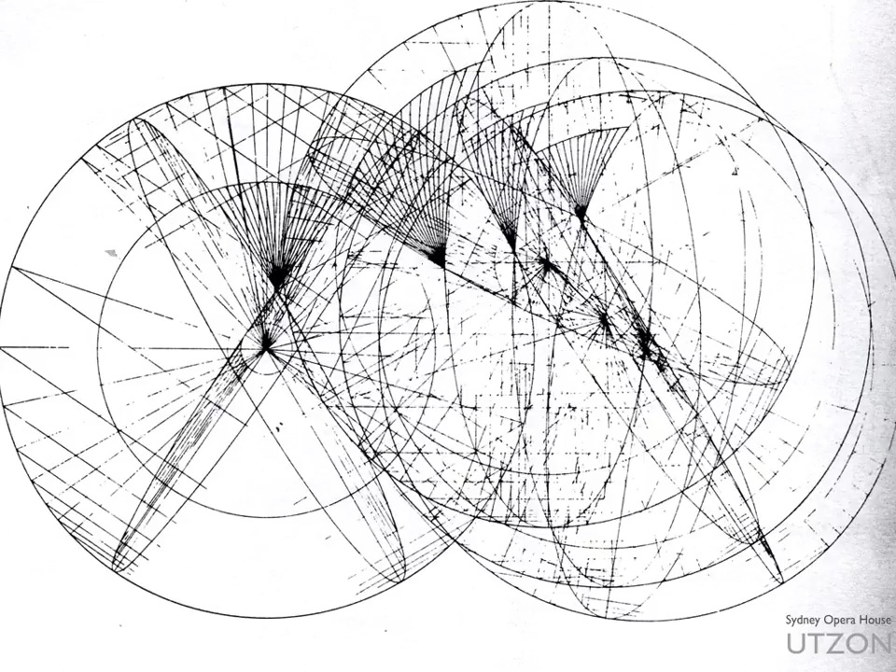The notion of parametrics in architecture has been around, but actually the Italian modernist architect Luigi Moretti really can claim authorship of it. He coined it in the 50s, in the 40s, even before the war, in his writings, and he encouraged in his research a link to modern mathematics, and his premise was that a new architecture will be labeled parametric architecture, and will be derived from absolute mathematical truth, independent of other factors.

So for Moretti, a goal of architecture systems was defining the relationship between dimensions dependent upon various parameters. He used the design of a stadium as an example of how its form can be derived from various parameters like cone of vision and seating arrangement, and acoustics. So different versions of the parametric stadium designed by Moretti were presented at his parametric architecture exhibition at the Milano Triennale in the 1960s.

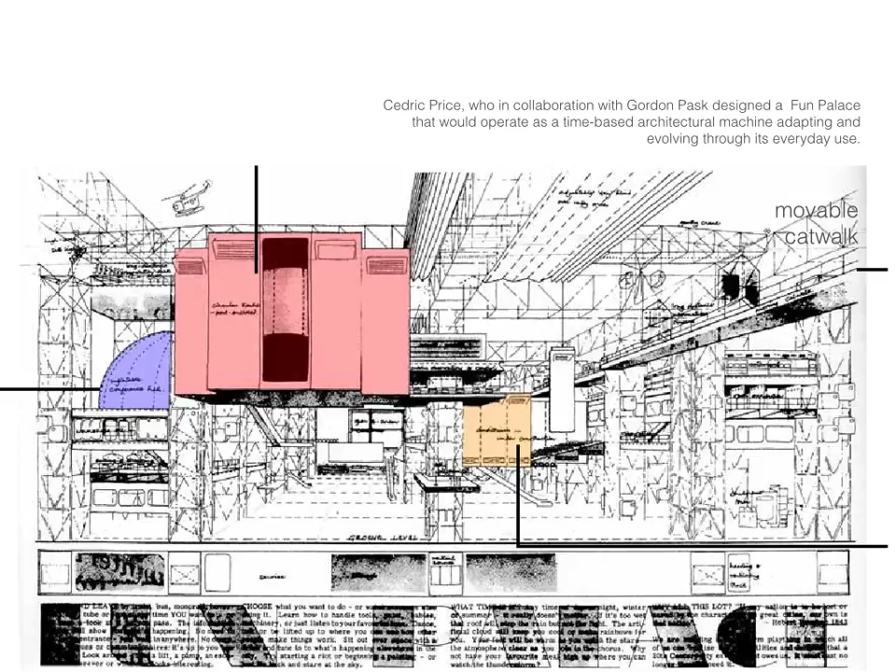And here is another aspect of the Fun Palace project, and this has a very surprising relationship to the building which you know well, which is the Pompidou Center in Paris, a competition won by Renzo Piano as a young architect about 5 or 6 years later. The use of space frame and use of an aesthetic of change and high-tech industrial aesthetic was very much proposed by those groups of people. So computing on one hand, and then this kind of stuff.

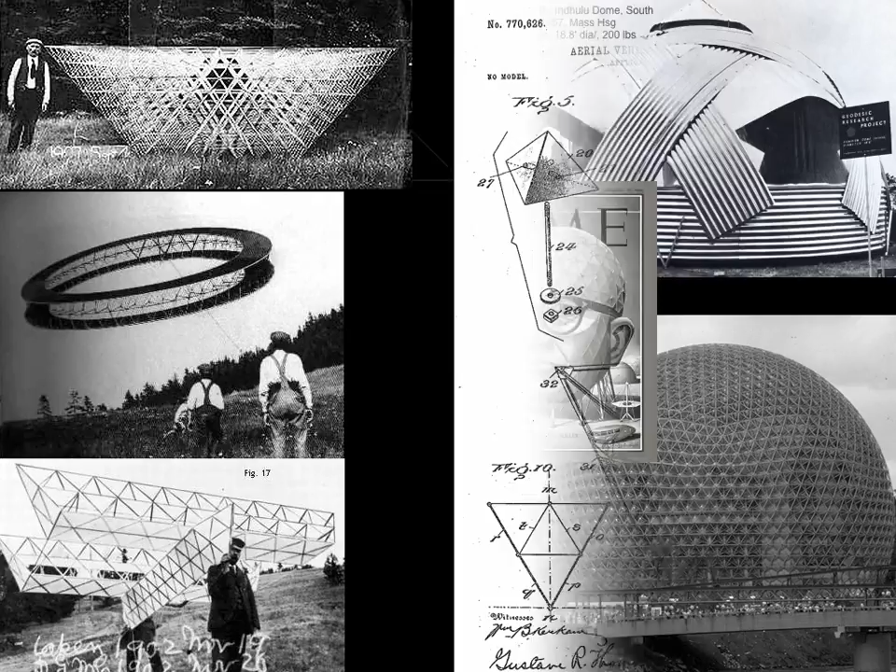Another person who pursued this issue of space frames and was very original in his work was Alexander Graham Bell. This is earlier than Fuller, and also different aspects. You know him because he invented the telephone, right? An American and later Canadian inventor. So he patented a space frame type of structure early on and used it for kites and his flying machines, which were largely unsuccessful, but the telephone was much more successful, of course. Those were frames which were rigid; well, they could fly, but they were rigid.

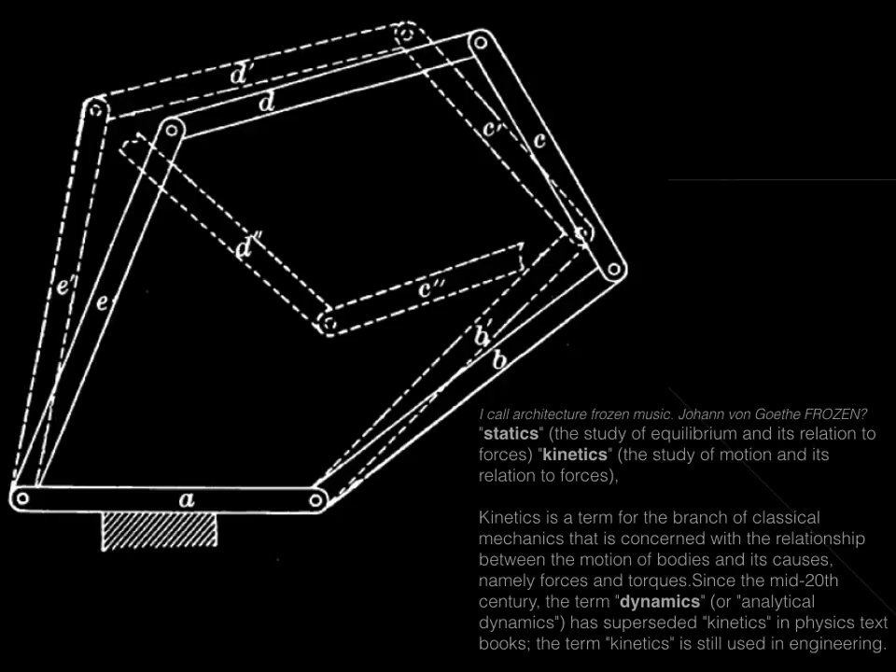So I want to make a little digression, starting with this famous detail of Johann von Goethe. He called architecture frozen music. I think we need to reflect on that a little bit more, because architecture is an equilibrium of forces, and statics are central to it. But kinetics, which is the study of motion, is also admitted now to architecture. The term kinetics, which relates to classical mechanics, is concerned with the relationship between the motion of bodies and its causes. Today, kinetics is substituted in physics by dynamics, and that in turn brings us to the study of motion.

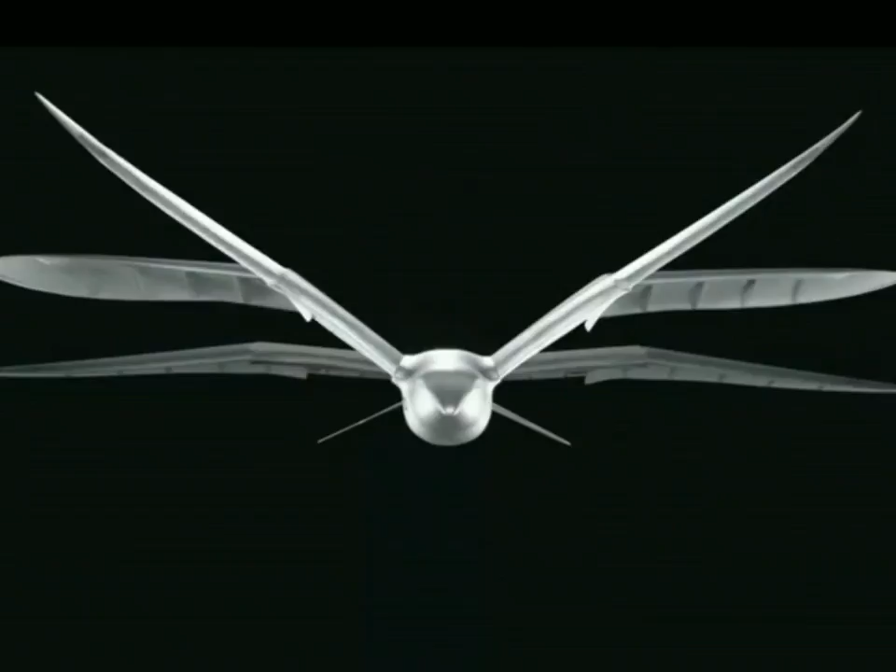So if you go down, you have the large area of propulsion, and if you go up, the wings are not that large, and it is easier to get up. So the next thing we did, or the challenge we had, was to coordinate this movement. We have to turn it, go up and go down. We have a split wing.

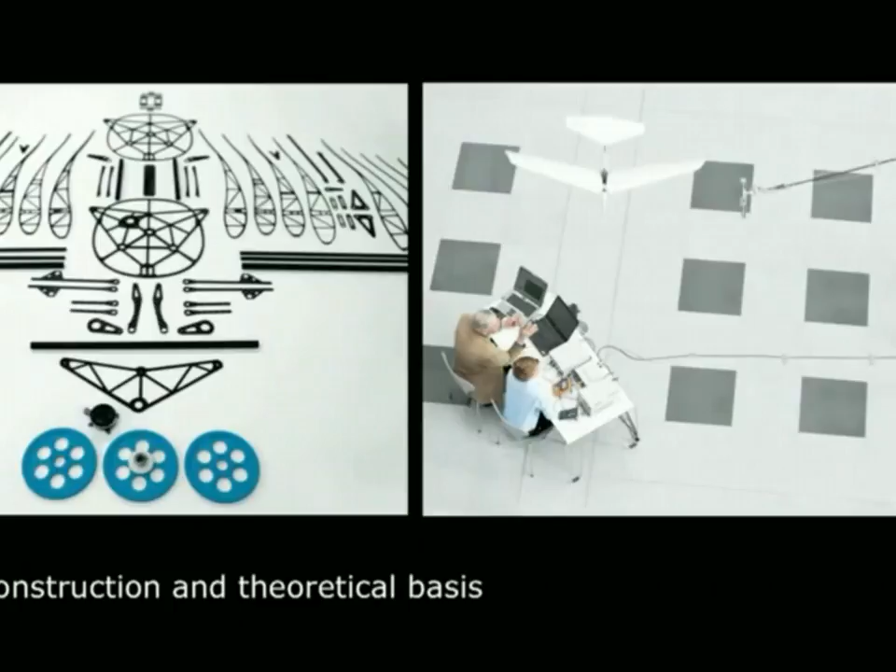With the split wing, we get the lift at the upper wing, and we get the propulsion at the lower wing. Also, we see how we measure the aerodynamic efficiency. We had knowledge about the electromechanical efficiency, and then we can calculate the aerodynamic efficiency. So therefore, it rises from passive torsion to active torsion, from 30% up to 80%.

Next thing we have to do, we have to control and regulate the whole structure. Only if you control and regulate it, you will get that aerodynamic efficiency. So I think it was interesting for those who don't know this project. I think this pursuit of analogy to nature is also important in some of those engineering projects, and also important in our discipline.

So that brings me a little bit back to the concept which you probably know from your history of architecture, the concept of metabolism. That's a group of Japanese architects. Among them, a key person in this group was Kikutake. And the notion of metabolism stands for transformation of cells of living organisms, which allows growth and reproduction in response to the environmental conditions.

So Kikutake's metabolism proposals were somewhat utopian, but they were distinguished by his understanding of the city as a generative process that works in a cyclical fashion and has the potential to further define and evolve the urban system itself. Its three critical principles were the investigation of alternative environments, adaptability of the city and housing unit, which had to be capable of being replaced as required, and the conception of architecture as ecological entities with life cycles that could be renewed in response to the environment.

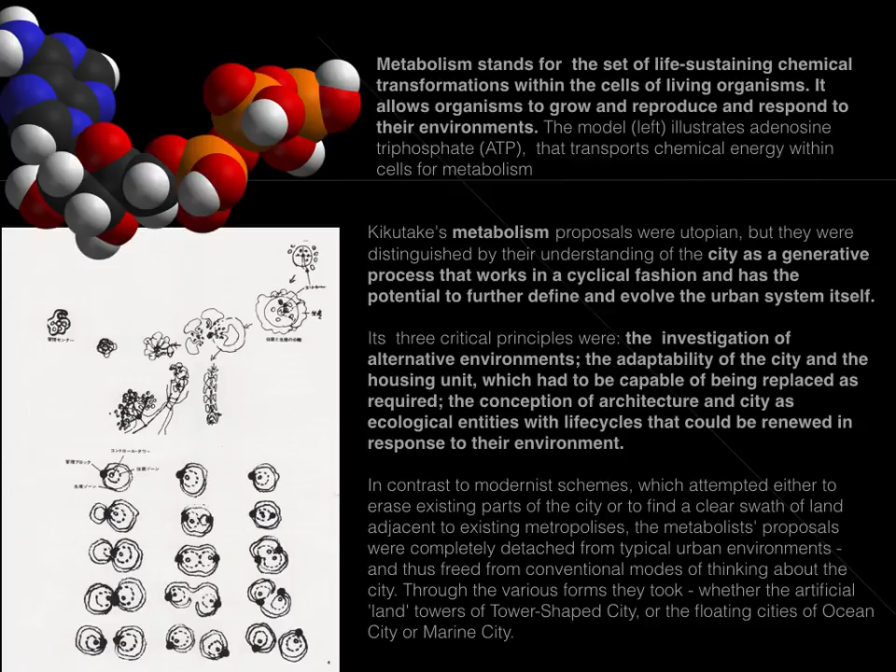So those early schemes proposed continuing metabolic transformation of the urban tissue, and their architecture was actually related to that. This was demonstrated by his project titled Ocean City, where living units could be replaced and the city could be transformed through a process of continuous reassembly and refabrication.

Interesting to observe as a sidetrack that one of Kikutake's star students was Toyo Ito, who later became a leading contemporary architect. So it's kind of connected, this culture. Of course, this was all before computing. In the UK, at the AA, there was a group of students and young teachers around John Frazer.

This unit was particularly active in the early 90s, and they explored the use of early computer techniques to empower the idea of evolutionary architecture. So it was a kind of form of metabolism, but there were also attempts to use generative tools, early CAD tools, to model and develop schematic projects which explore this concept of evolutionary architecture.

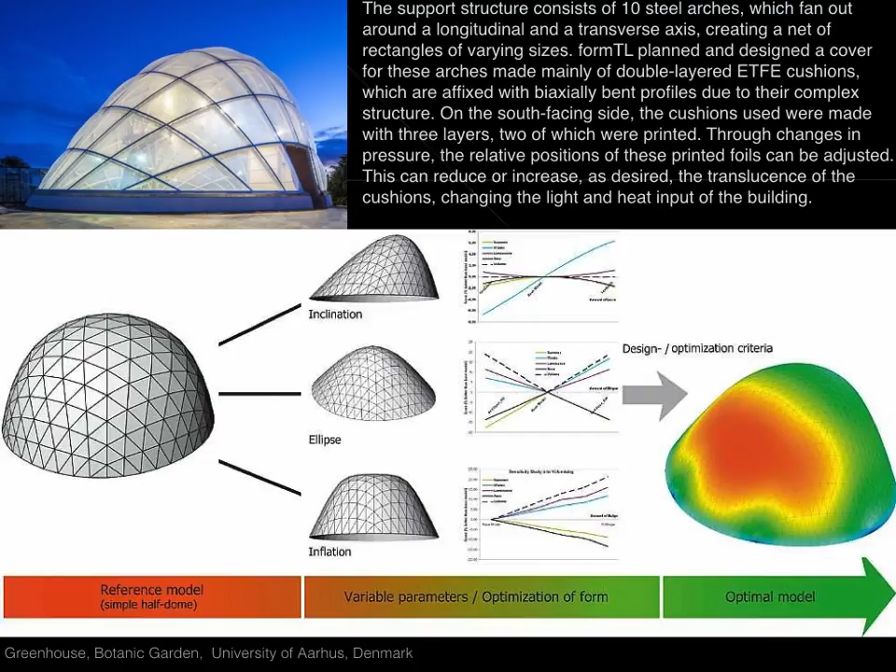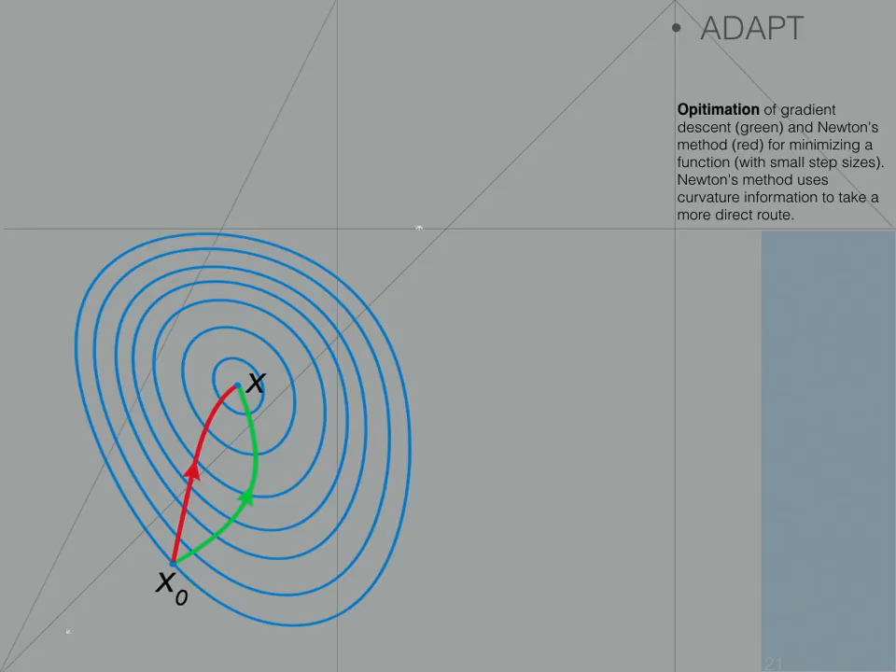There were optimization techniques which I will not go into, but I want to make a reference that those techniques are to some extent inspired by natural strategies for optimization, because it is well known to people who study natural sciences that those processes have always been a source of information and inspiration to science. Organisms which are single cell, like bacteria, can often engage in a rich repertoire of interaction and resolve into a kind of system which is active.

Now, the introduction of modeling, particularly 3D printing tools: at an early stage they were still kind of pricey, so only big units could have access to them. Norman Foster's office had a part of the office devoted to this problem, which they called the specialist modeling group, and they explored this new geometrical territory through the use of programming and parametric software. This was way before Grasshopper came about, so it was hard coding.

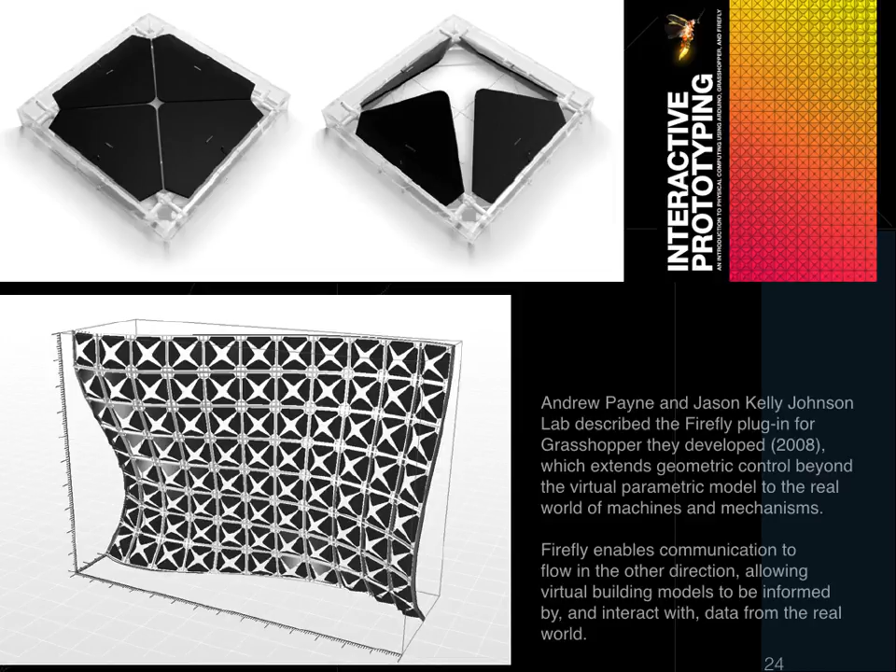So that was a very important step for parametric design to start being fed with environmental factors. This was a very important tool, and it's still in existence and developed. I think we use it in our robot studio. One of the projects which emerged relying on the dynamics was the kinematic facade of the Ocean Pavilion for the 2012 Expo in Korea. I think you know this project well.

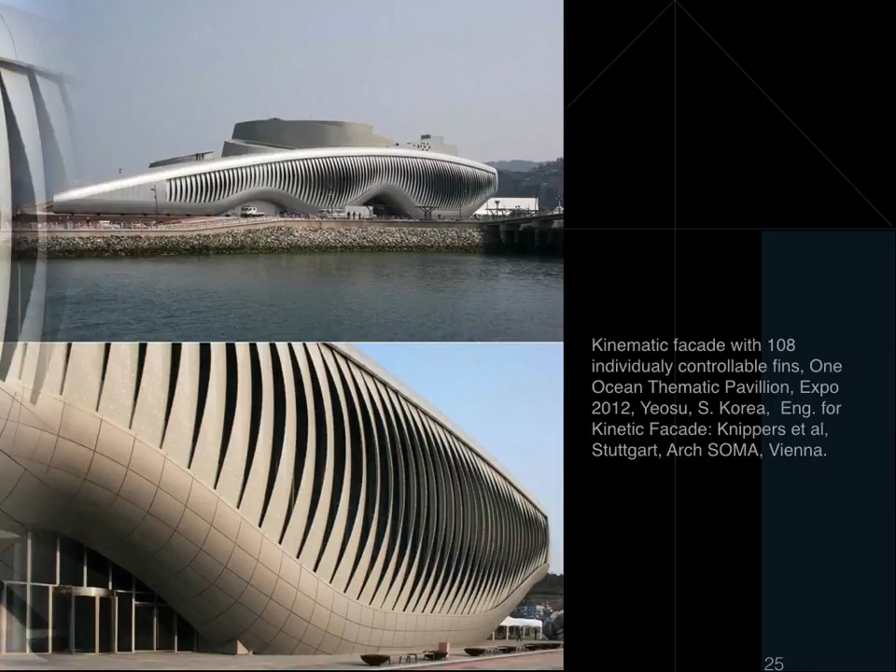This was the winner of the competition and had these fish-like fins, which were de facto a kinetic facade made out of fiber reinforced plastics, capable of being morphed into a number of animated patterns depending on the program requirements. This work in terms of programming technology was done at the University of Stuttgart, where those biologically inspired motion mechanisms were brought to architectural scale.

Those new techniques require, of course, closely related fabrication methods, and they are related to parametric design. There's a relationship of fabrication to parametric design. Digital instruments and practices have the potential to narrow the gap between representation, between design and making. Its essence is the ability to generate construction information directly from design information. That is why people predict a new role for the architect as that of digital craftsman.

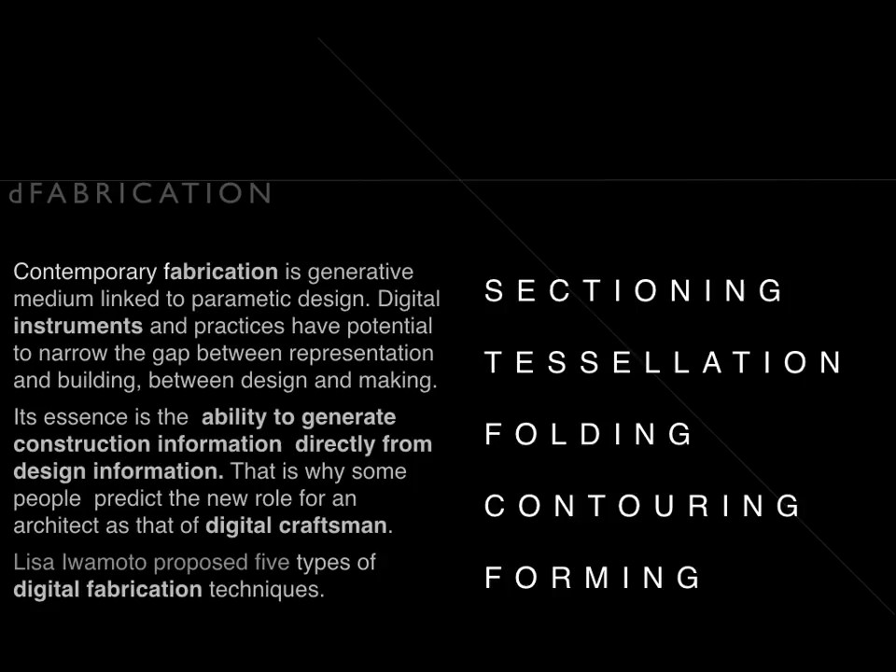Lisa Iwamoto, a young teacher in the US at the time, wrote a book where she tried to organize different types of fabrication techniques. She proposed 5 types: sectioning, tessellation, folding, contouring, and forming. This is an arbitrary structure, and I think you can devise your own, but the type of design emerging from each of those techniques has its own characteristics. So sectioning, where the 3-dimensional model is bisected, layered. Ask the Box, the project Professor Swick's students did here a few years ago, was exactly that.

It was sectioning. Another methodology for fabrication is tessellation, where the object is tessellated and then flat elements are produced with CNC and assembled. They are closely related to the method of designing. The method of production has become related to the method of designing. The concept of folding as a production of the object is also kind of obvious. Another category of fabrication she sees as contouring. This is done with CNC by removing the material. And the final category was forming, where things are cast.

Extending this concept of new condition for design, triggered by initially CAD and then parametric design, algorithmic design and fabrication. The impact of it is now entering public domain. I want you to take a look at the work of Meejin Yoon, who is now a young professor at MIT.

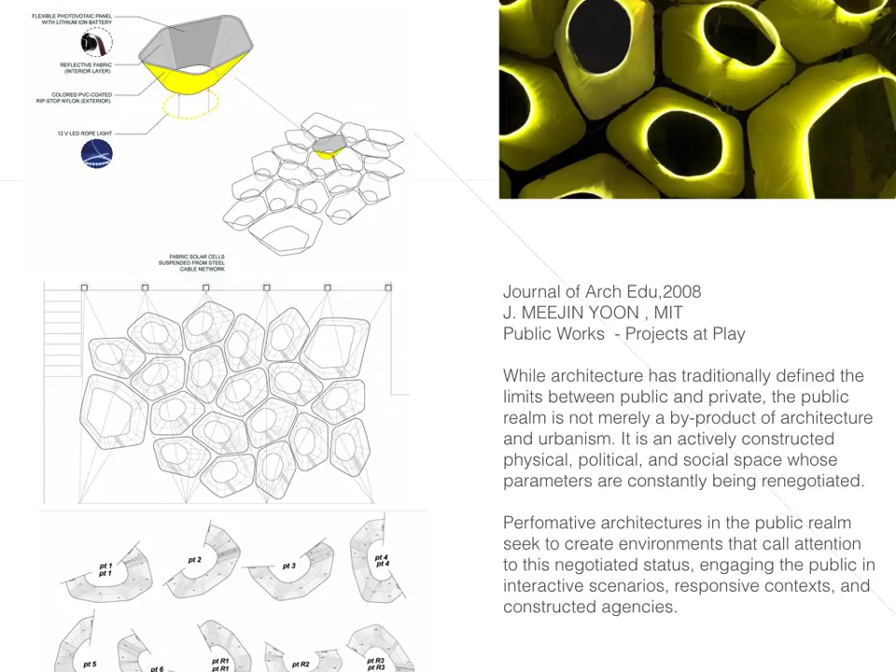This is a project which we'll see in a minute in some detail, which is an interactive installation in the form of a suspended ceiling, where photovoltaic panels were gathering light and lithium batteries charged to also generate LED lighting. And the process of making it and assembling it was important to her. I would like you to look at a fragment of her lecture, which is not that old. I think it is interesting.

So there's really nothing I dislike more than public speaking, and that's odd for someone who's so invested in the public sphere and the public realm. I'm trained as an architect, so I'm used to building walls and separating myself from the public. One of the things that has fascinated me is this kind of sometimes invisible line between public and private.

This is a piece by Vito Acconci called Following, in which he has a very simple set of rules for this performative practice where he decides to follow someone in public space, and as soon as that person goes into a private space, he waits until he sees another person and follows them in public space, and so on and so on. And by engaging in this itinerary, he actually remaps the city based on a series of individuals' experiences of publicness within the urban context.

So, I don't know, 15 years ago, I arrived at MIT, very uncomfortable because my background is not in technology. I went to pretty traditional architecture schools, and when I arrived at MIT, I was very anxious. So the first thing I did was I decided I should take a course, even though I was a faculty member. So my first semester as an assistant professor, I took a course called How to Make Almost Anything. It's at the Media Lab, taught by Neil Gershenfeld, and it's a crash course in microcontrollers and fabrication.

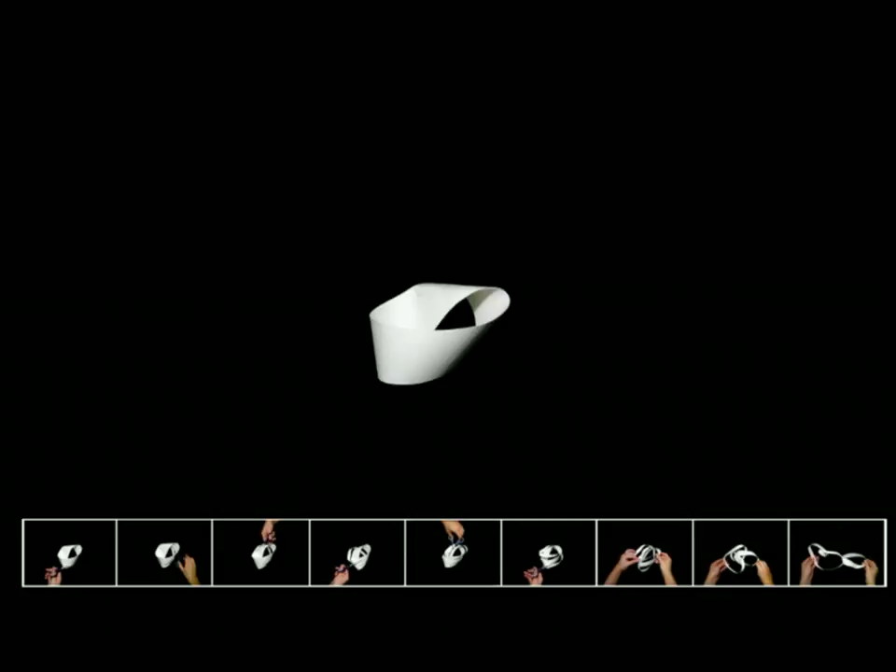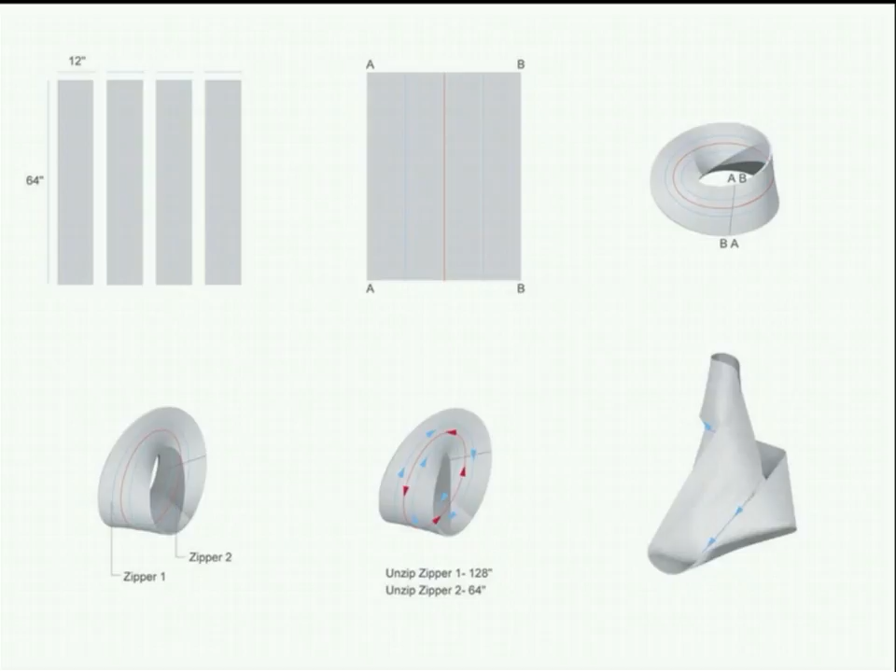And so I wanted to synthesize these two ideas and create a garment, and this is the Mobius dress, and essentially it is a literal Mobius strip that's turned into a wearable garment. The idea is to combine both the curvature of the Western garment and the efficiency of the kimono, and to create a very, very long linear Mobius strip with a super long custom zipper, so that this Mobius strip can be worn, essentially to be unworn, and as it unravels, the body structures the form of the garment in different ways.

So in terms of responsiveness, I think that architecture has a way of creating relationships between content and context in the public sphere. Also, about a decade ago, I was asked to do an exhibition, and this was what was given to me. It was an itemized spreadsheet of about 400 Aztec artifacts, and the curator wanted to display these objects in the Guggenheim Museum. And the first thing I learned was that the Guggenheim Museum was too small, that because of the geometry of the Guggenheim along the ramps, there wasn't going to be enough surface area to accommodate all these artifacts.

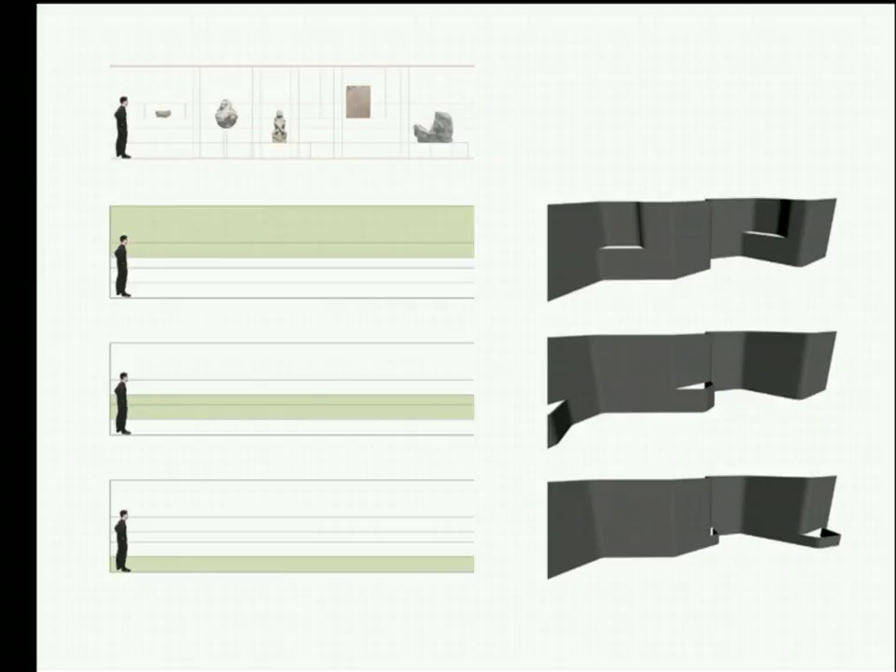So the design idea became about creating surplus surface. And in order to do that, there was a very simple formula of undulating a wall in and out. And all of those objects had certain criteria associated with them depending on which lending institution they came from. So certain objects needed to be behind glass, others didn't have to be. There were issues of scale. And so it was the first time where I designed something via a spreadsheet.

Essentially, what we did was create these pocket parameters where every artifact was tagged with the way that the wall that housed it needed to behave around it, to create a mediation between housing the artifact and the context of the Guggenheim and its ramps. And it became a really useful design tool and visualization tool to move back and forth with the curator, who constantly changed the sequence and order of these artifacts until the very last minute.

And the wall is clad in half-inch thick felt, and the other thing it did to transform this public space was it absorbed not only light, but sound. So it created this deep, dark, mute envelope, and I guess you can tell because this is actually a very live space, but acoustics affects how you understand public space. And so here at the Guggenheim, for the first time, this deadening silence instead of the live bouncing of noise altered your tempo, your perception of the artifacts.

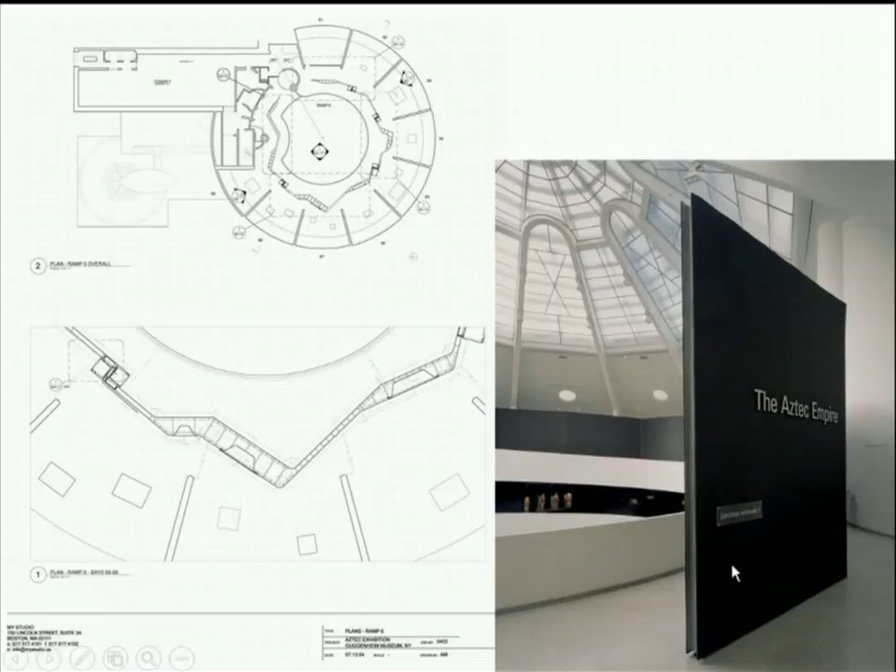So essentially, you come up the backside, you see all the large artifacts that didn't fit in the system, and then you come back down on this side. And when you come back down on the other side, these are the environmental vitrines for the really precious artifacts. And in order to see them, you essentially have to get right up against that felt wall. And this is the view looking down.

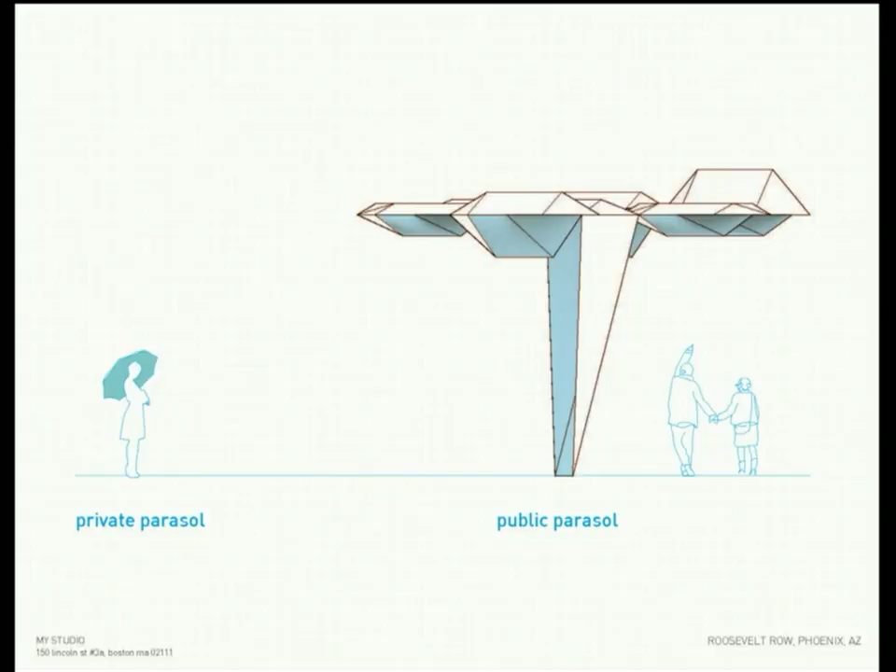So this notion of responsiveness to context, I think, also refers to the environment as well. I was asked to do a public space project in Phoenix, and it seemed that the only way to create public space outdoors in Phoenix was essentially to create shade. So the project became about creating shade through this notion of a public parasol. I'm, as you saw earlier, fascinated by Mobius strips, and so essentially the unit for this shade device was a Mobius strip, a very efficient strip.

But what was important about the geometry was that in certain angles, it would cast a shadow to create shade, and in other angles, it would frame light through a shadow. So the project is called Shadow Play, and it clusters these Mobius strips together to create this public parasol. The public space is in a traffic island, a triangular traffic island.

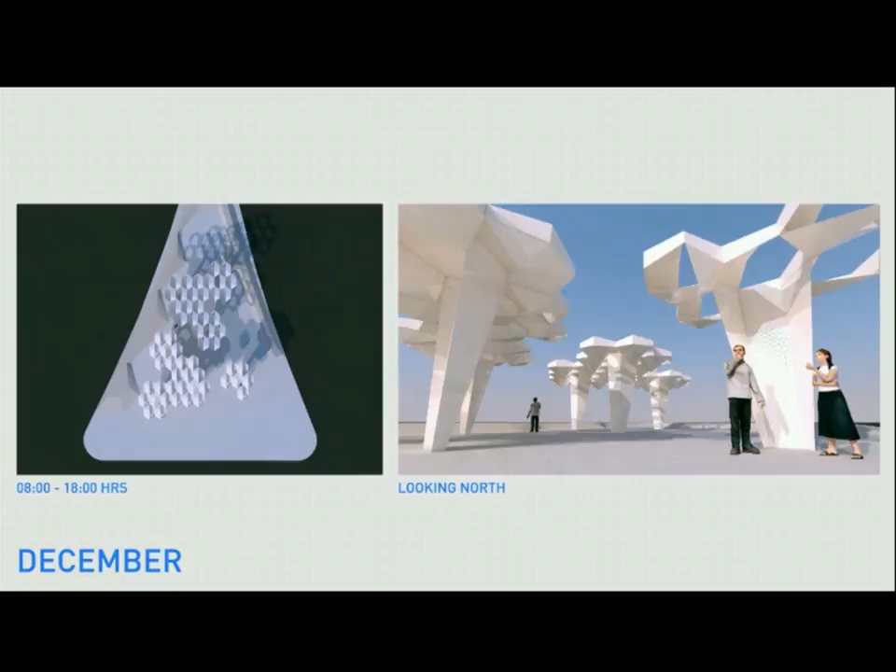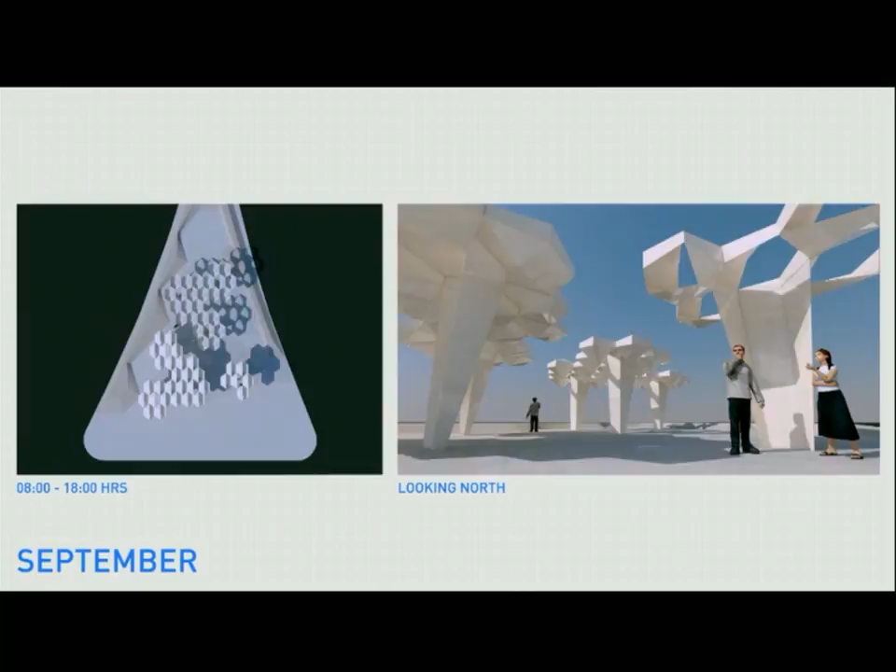And what was really important was to understand the relationship of the shade and shadow based on different months of the year, depending on the solar angle, and to make sure in the hottest moments there was maximum shade, but in other parts of the day, morning and evening, there were opportunities actually to see the sky, to create ventilation, and to cast these dappled light shadows.

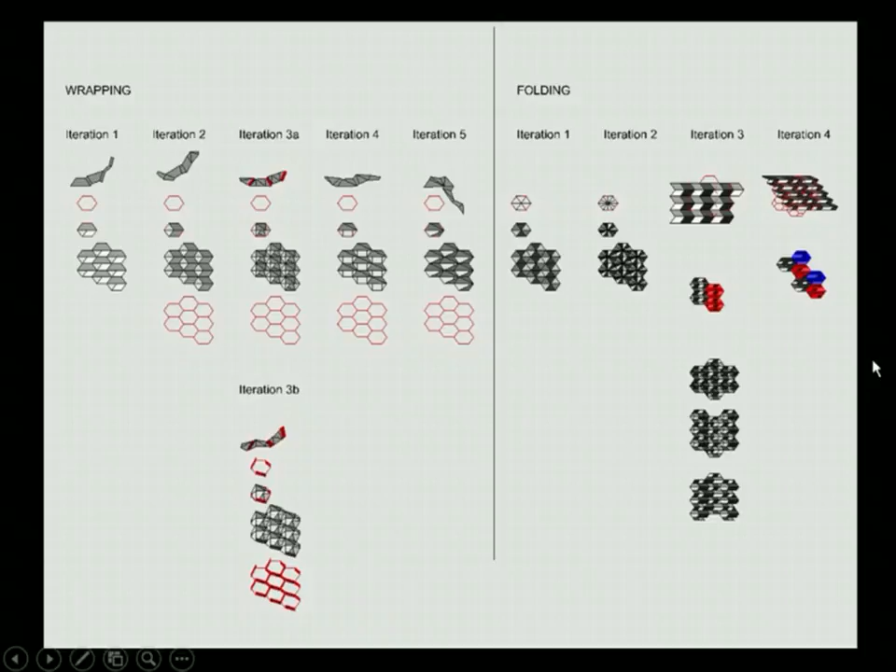And what also became really important was how to minimize the amount of material to create this shade. So these are a series of different iterations that look at the geometry and the structure of that geometry and how much material it would take. So these are different deflections of different geometric iterations of those units. And you can see that depending on the geometry, they torque and twist and deflect in different ways.

And through these studies, we were able to reduce the amount of material by, I think, 20 tons, which was quite substantial and reduced both cost and material use. So it's super thin, almost feels paper thin. It's currently under construction and it should be done in a few weeks. Sorry, I said days, weeks. I wish it were done in a few days. But the top of this canopy has solar panels, and so at night, it emits the light.

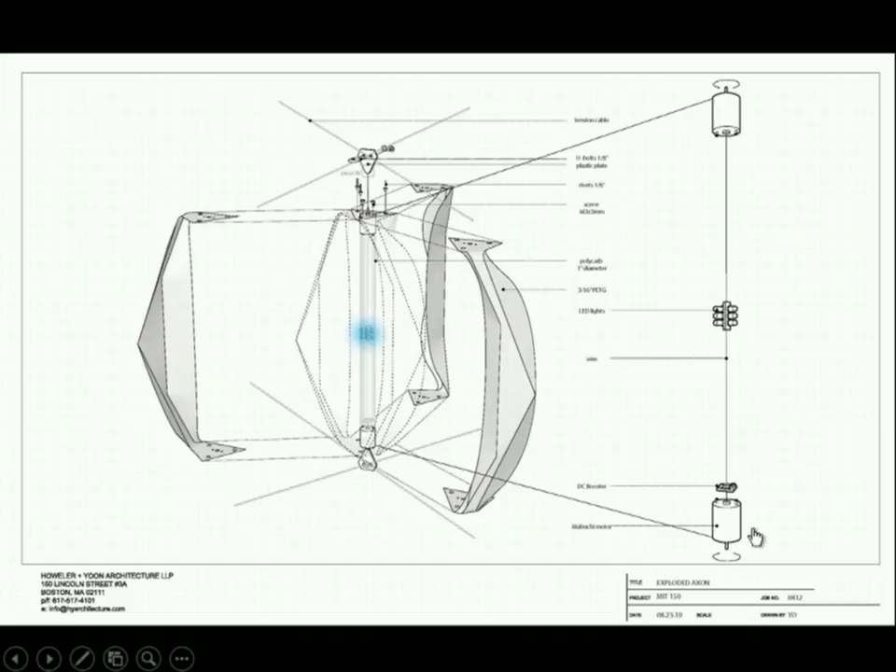I think the other thing about public projects is they make visible things that people are less aware of. And so this is part of an environmental series. This one's called Windscreen. And with very, very cheap materials, I think all of these things cost, if you add them together, $2.50, to create a micro wind turbine and to affix it to a building at MIT that is notorious for its wind. It's called the Green Building, because the wind's coming across the river and then it goes up this tower and then back down.

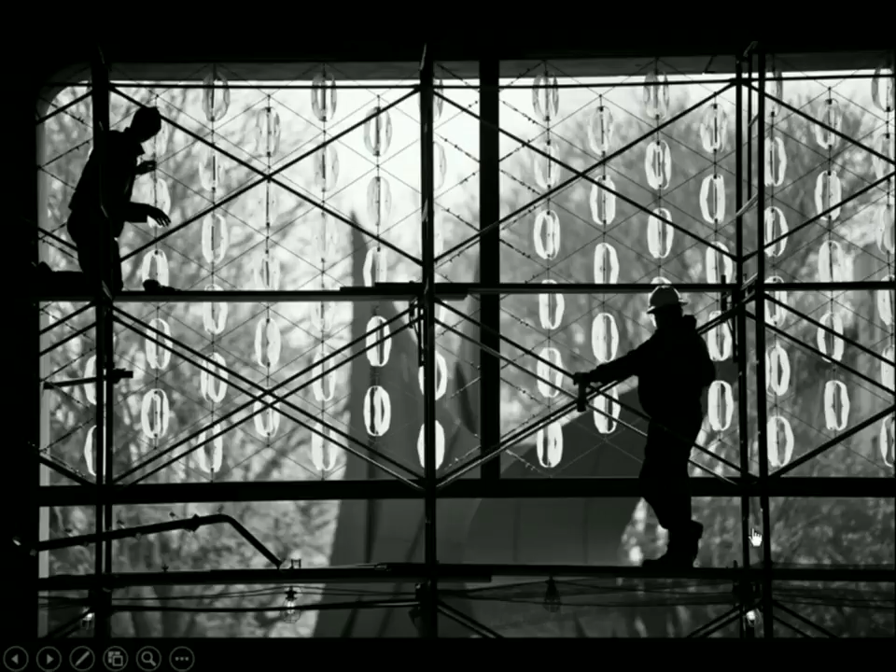So in the portico, we hung these small windscreens for MIT's 150th anniversary. And the idea was just simply to make visible this natural, abundant, renewable resource that's around us all the time. And basically the speed of the wind, the angles of the wind, is generating the light quite literally through the mechanical movement of the turbine. Nothing's stored, it's just purely made visible.

And this idea of making something visible in order to mediate is something that's interested me in the architectural work as well. And so a few years ago, I had an opportunity to design a space for the Boston Society of Architects. They had a competition because they were moving from a very vertical building to an adaptive reuse building in which they were getting a large square footage on the second floor of the building. The BSA has a kind of notorious old boy reputation, insular, and so this became an opportunity, I thought, in the competition to really celebrate it as a public space.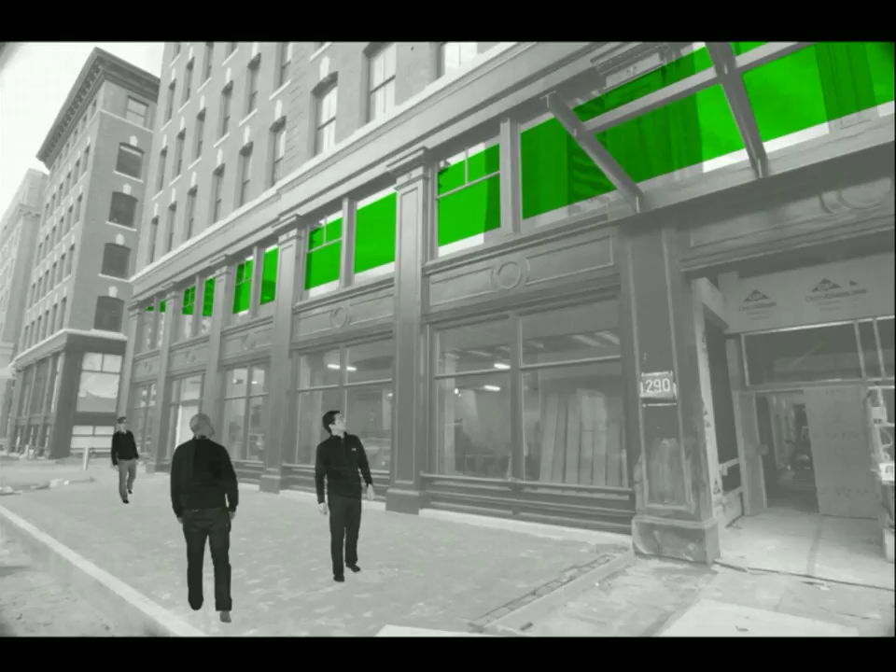And so part of the program brief was it had 20,000 square feet of space, but 5,000 square feet was dedicated to public gallery. So for the competition, what we thought was important to do was, given it's on the second floor, be very strategic about it. So how do you get someone to pay attention and know something might be accessible in public on a second floor? So we gave it this bright green ceiling. And then the key was really, how do you scoop people up to get them to that second floor?

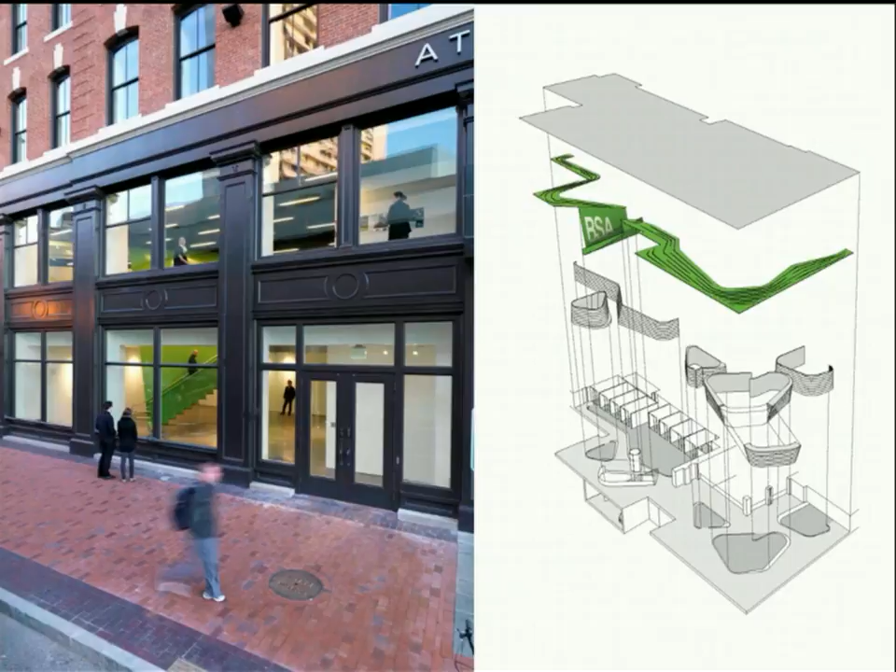So we wanted to create a supergraphic that extended beyond each of those kinds of windows, something unusual that would draw people in. And then what we did was we pushed all the office spaces and administrative spaces towards the back and put the conference rooms interspersed in the middle as islands in order to essentially create a mixing chamber between the architects, the students, and the public, but fundamentally to give up all of the perimeter to the public gallery space.

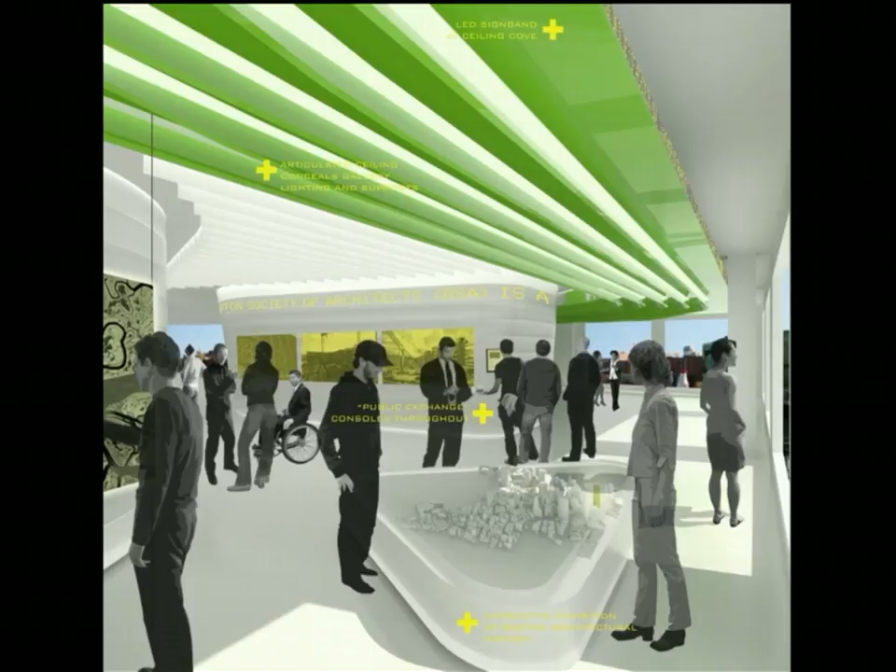So this was a risk in the competition because they didn't ask for that much gallery, and we turned the whole thing into public gallery. But somehow it won, and the BSA has really transformed because of this set of spatial relationships. So the stair is made super thin. It becomes the ceiling, which then has the infrastructure for all the exhibitions in terms of lighting and tracks to hang work.

And we thought it was important to have the gallery on the perimeter so you could always be aware that what was happening and being exhibited in the galleries was clearly having an impact or transformative of the urban context, or could be if people were willing to think that way. The strongest element of the space was the stair to get the public up one floor. And we wanted to make it, again, paper thin, and use that surface as a mediated surface. And so here, this is the BSA Twitter feed projected on the stair to draw people in.

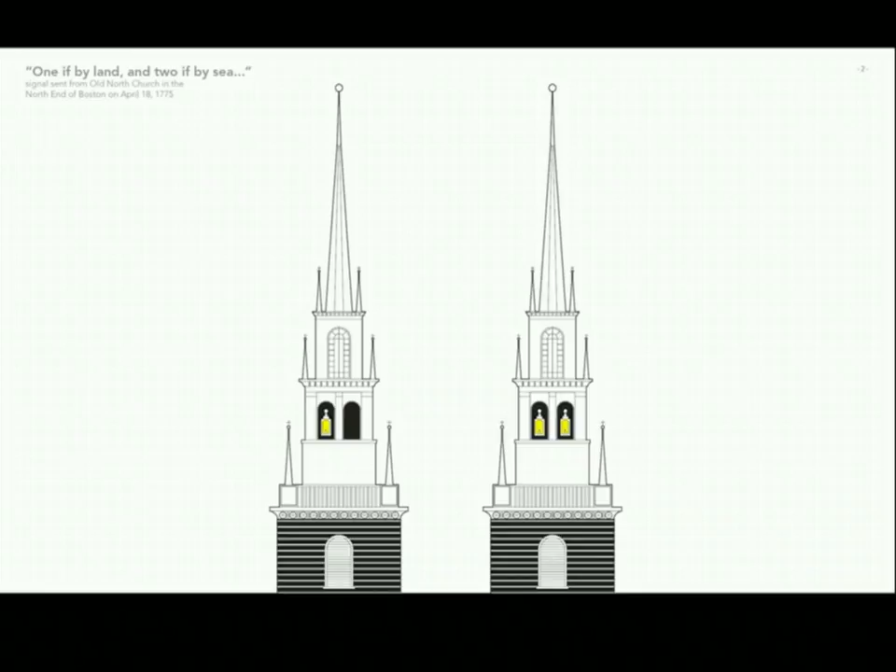So this notion of communication, I think, is very important in the public sphere. And I think, as you can see in my work, I often use light because I think light is communicative, and I love this, one if by land, two if by sea, that very simple on-off can actually have a powerful, powerful message. A few years ago, I was asked by the General Services Administration to create a light installation at the U.S.-Mexico border in San Ysidro.

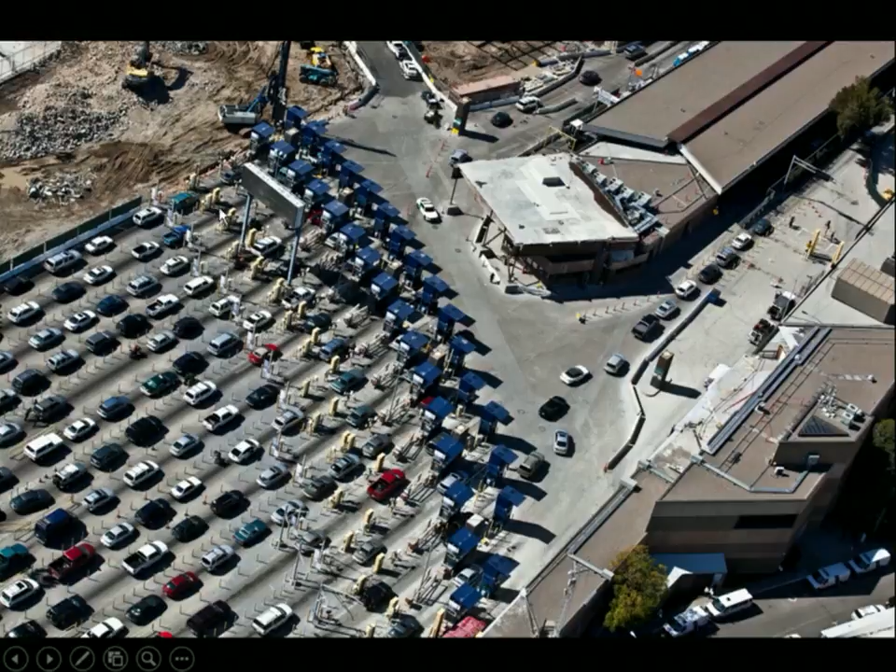It's the largest land port in the United States, and they were making it even larger. Apparently, it could take up to 6 hours to cross this border by car. So they were expanding the lanes to 27 lanes, and this is designed by Miller Hull. And I was asked to create some art here. And I was like, okay, what do I do? There's really no site, so I decided to be very minimal and integral with the piece.

So it's called Double Horizon, and all I did was create a linear light fixture, essentially, under the canopy. But what the light fixture does is it basically shows in real time the movement of cars through these multiple security checks as they go through. And so this drawing shows that there are, I don't know how many sensors there are, but over 30 sensors for every car in terms of the things that are being measured and scanned and weighed as every vehicle goes through.

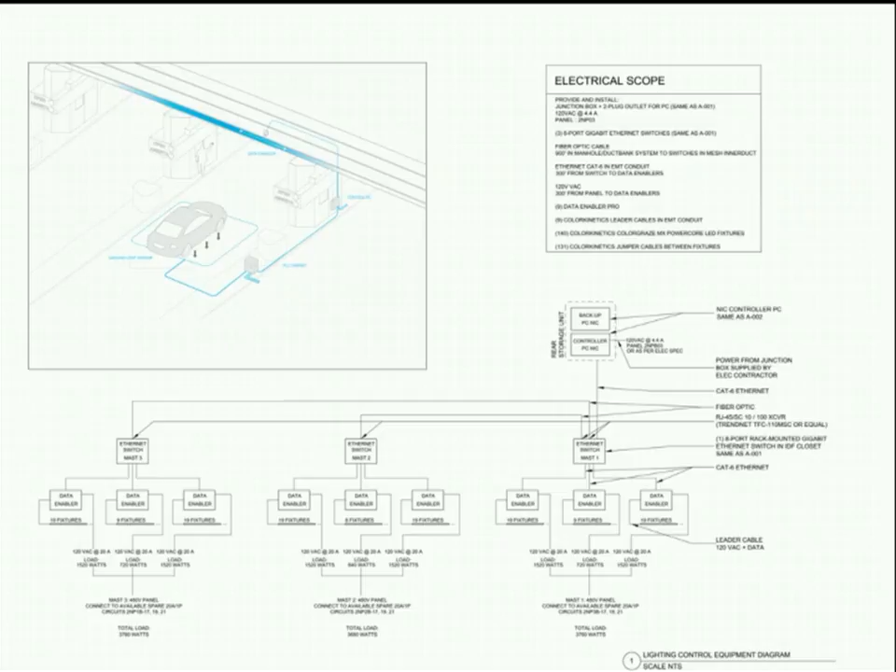So the piece was very simple, that there would be a kind of flicker of light every time a car passed through the security check, that light would flicker outwards, and as other cars move through the 28 lanes, it would also create a kind of moment and a ripple, and then these would interface with each other. Very simple idea. Really hard to do at the U.S. border, because of all the issues of security. And so even though there are so many sensors and all of this data is being recorded, we were unable to access or tap into any data.

And in fact, they wouldn't even allow us to run our fiber optic cable in the same conduit as the other fiber optic cable for fear of adjacency. So we had to do a workaround, which basically is able to, without tapping into their infrastructure or information, know when a light is switching from red to green or when there's a change in current. And we tap into that information in order to create Double Horizon.

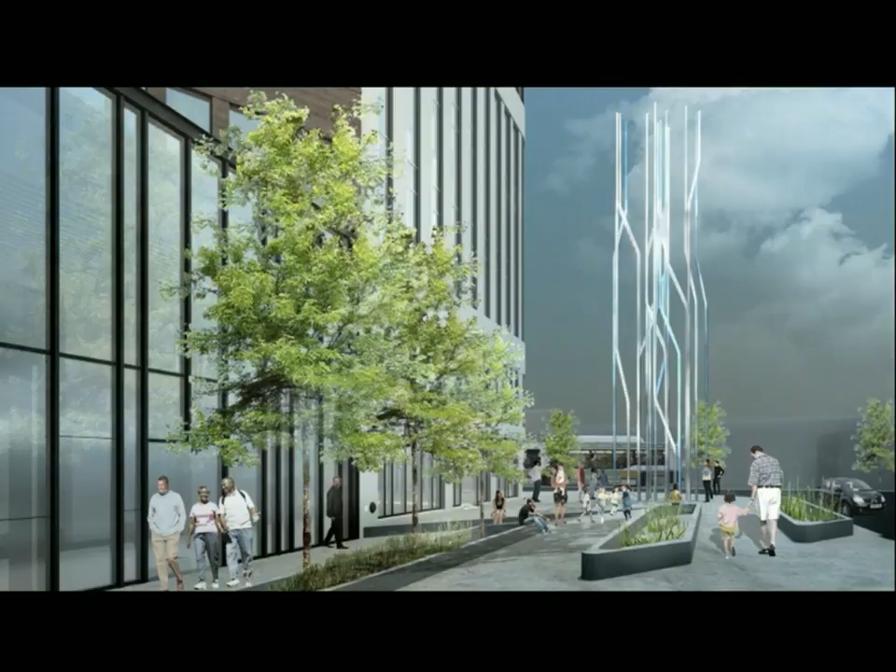So this is one evening a few months ago. You can see the light rippling through, and you can see this pretty far back, and something to pass the time as your 6-hour wait has been reduced to now about 40 minutes. So this idea of data and public space, I think, is really a new field. And recently I was asked to do a sculpture for Dudley Square in Roxbury in front of a new building for public education. And the sculpture is very literally a sculpture.

But what we wanted it to do was actually reflect the citizens' engagement with the city. So Boston has been pretty innovative with New Urban Mechanics, and they have an app called Citizens Connect where you can take a picture of a pothole and report it, and take a picture of a broken sign and report it, or note when there's trash removal that needs to be done. Very, very banal stuff. But I think what's so interesting about it is it's a direct communication feed between the citizens and the city, and the city has to respond back or take action within a certain duration of time.

So the sculptural piece, which is a kind of unrolled map of the city of Boston with the different neighborhoods, is recording in real time and playing back all the reports made through Citizens Connect to the city. And each of them are tagged in terms of what kind of report is made, how the city is responding, and as those tickets are essentially closed out, the light begins to fade.

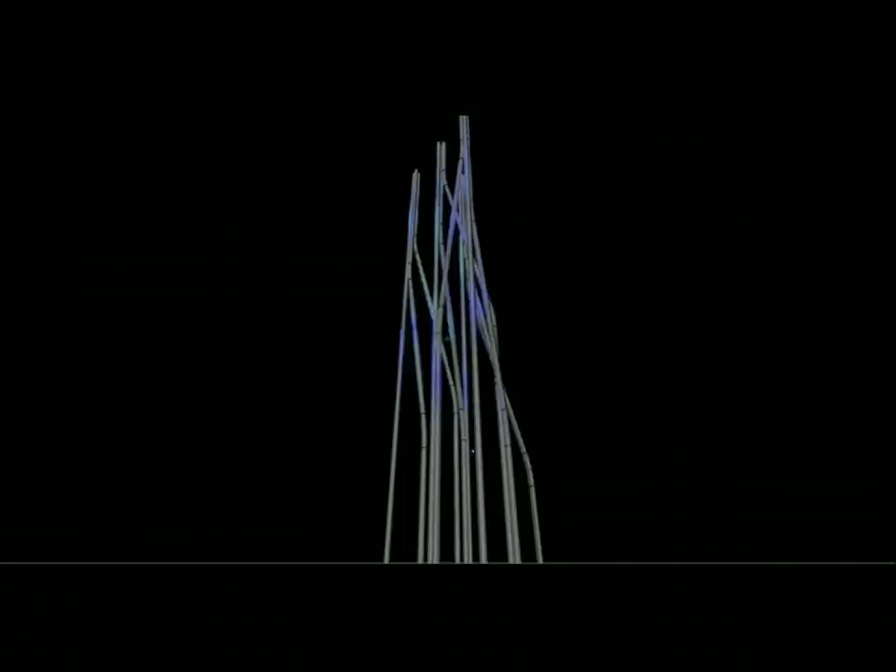And what's interesting is you see that certain areas are clearly more app used. There are more app users, and it reflects the demographic of the city as well. So you see a difference between the affluent areas and the less affluent areas in the city, which I think is important to register back to the city and its citizens. And so this is a kind of simulation of the piece, and it's currently under construction.

So the other thing about public space, I alluded to it earlier, is the rules of engagement and questions we put out there. So, my husband's actually a little bit germophobic, and so he won't touch anything in public space, like a subway. He won't grab onto the bar and these kinds of things. And I was curious, will people touch things in public space?

So we were asked to do a project in Dubai, and again, it was a sound installation, and we were asked if we could do something with bird songs, so sure. But for me, what was interesting to test in this piece, which is in a mall, is will people want to touch an urban instrument? So the piece is basically a series of light poles with capacitance, and it's all handmade, and a speaker, and then this is a little cone that helps to diffuse the sound through the pole. And you can see if people want to touch things in public space.

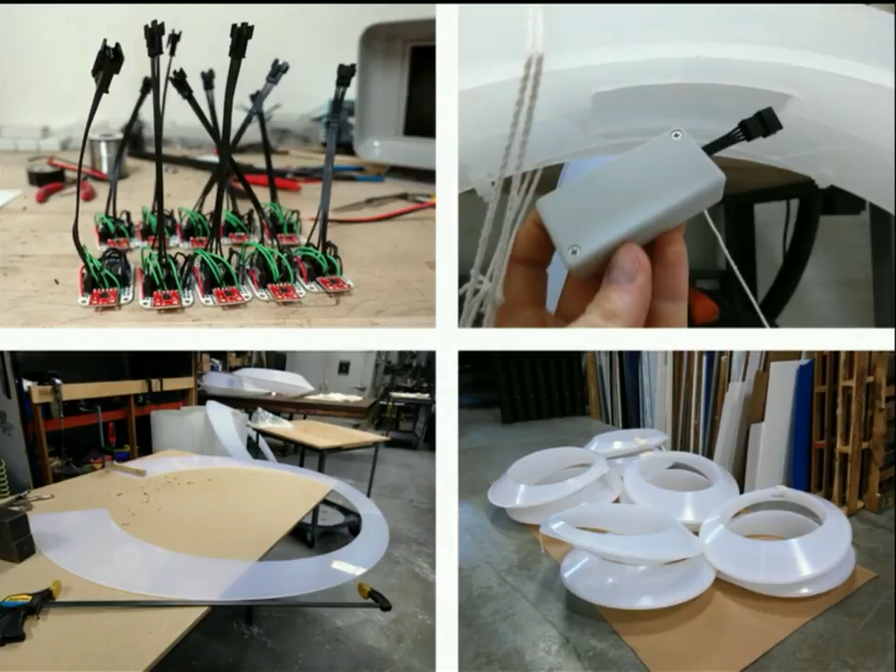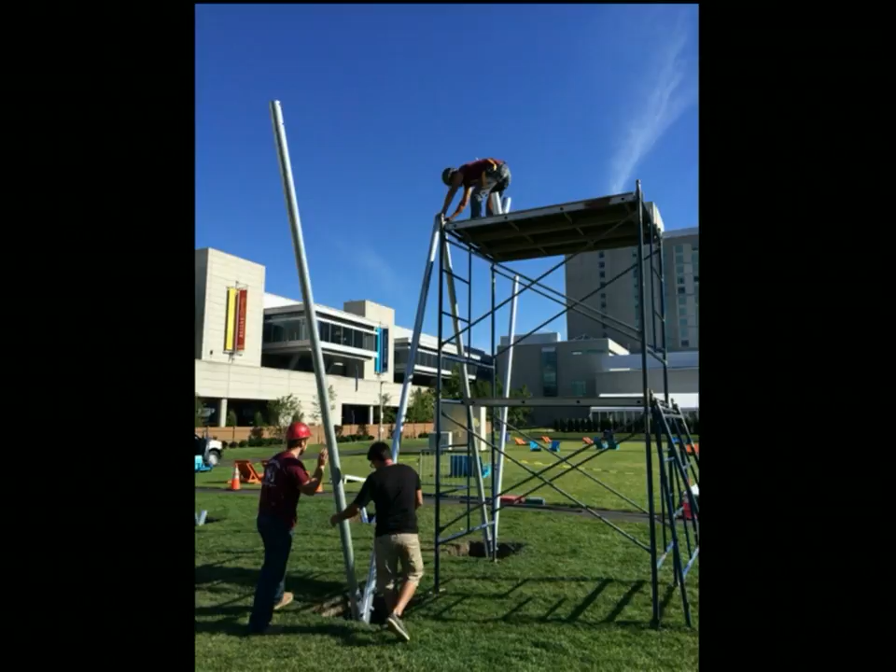So it's a very low-tech kind of project. It's a temporary installation, so there's an accelerometer, and depending on the angle that you swing, the light changes to reward you for the higher you go. And we wanted the swing set, even in terms of the structure, to seem somewhat familiar but out of scale, so that as an adult you feel like a kid again in terms of scale. And then this year we added solar panels to it, so it's completely off-grid and powered by the sun.

And so recently it opened. The opening event had 3,000 people. It was very well loved. And in fact, the client was telling us it's being loved to death, in that people are using it so much that it is breaking constantly. So we were asked to make a sign about what is allowed and what is not allowed on the swing, and we put these signs everywhere. But despite all the signage, they're used by the public the way the public wants to use them.

So the other great addition to this installation is there's a bar right next door, and this public park allows drinking in public space. And so alcohol, swings, you kind of get it, right? So this is a collection of some of our kind of favorite images. People love to take selfies on it. People do strange things.

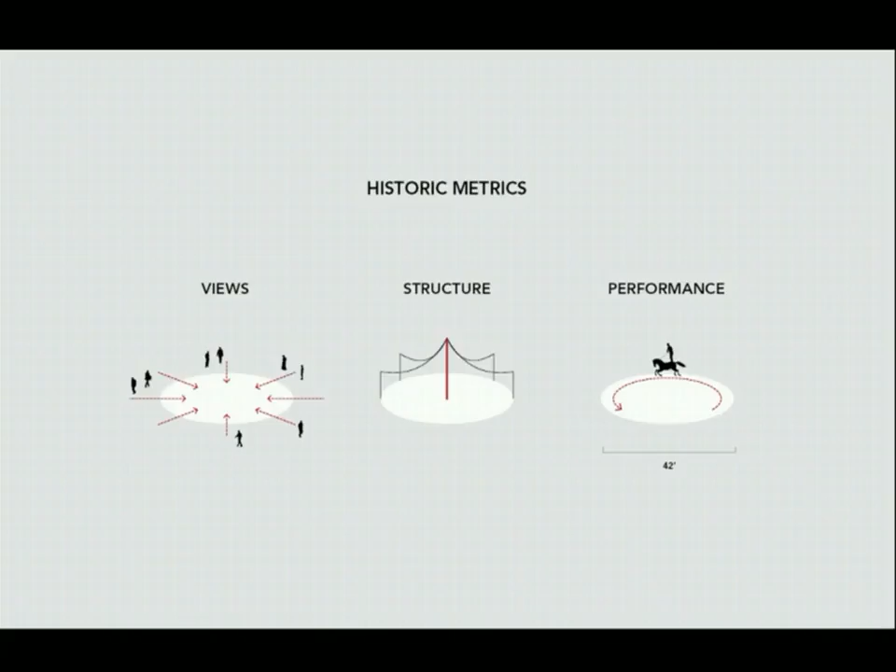But in addition to the classroom, it has this training room. And so the client came to us actually with this beautiful sketch from The Little Prince of the Hat Elephant, and asked us if we could design a circus around that notion. So one of the first things we learned is there's this interesting metric, even in Cirque du Soleil today, based on this 42-foot diameter circle. And that diameter is actually based on the perfect radius a horse can run around in a circle. And that has determined a certain realm of performance arts for hundreds of years.

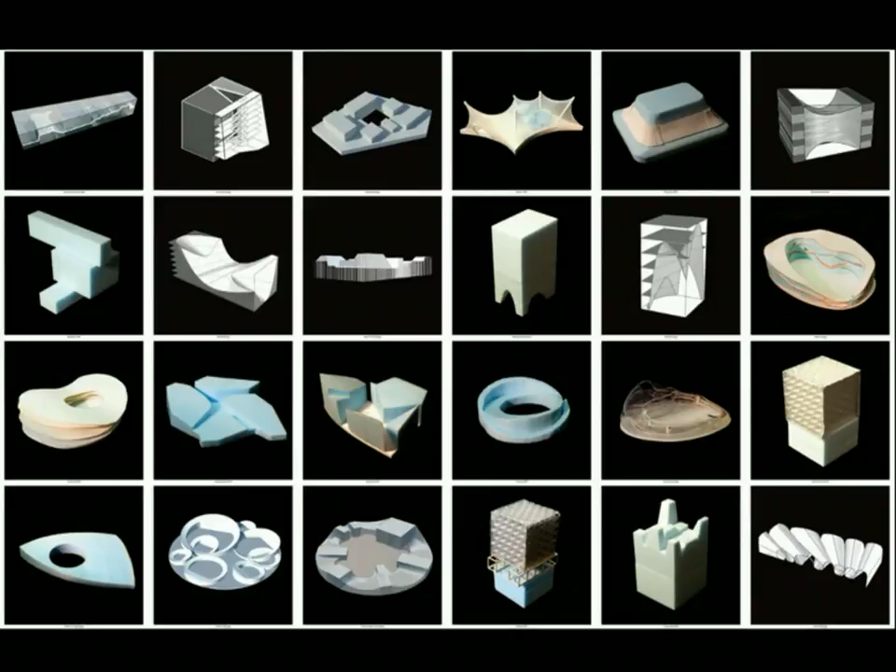So we wanted to bring the circus, the elephant, the hat together, and we started designing all kinds of things, just crazy, but when you're trying to design something with the goal of just difference, it's very hard to latch onto something. So we went back to the clarity of the hybrid between training and education. And this is the site, Thompson's Point. And basically, we took these rigid program elements, and instead of forcing a circle geometry, we actually just put them in the round, literally with each other.

This essentially allowed us to take the big training volumes, to lift them up in space in the round, to give them these amazing views out on Thompson Point, so that when you're in the practice room, you have this incredible vista outwards, but also allow them to look inward through the public shared space at each other, similar to this layering that's in Trisha Brown's work.

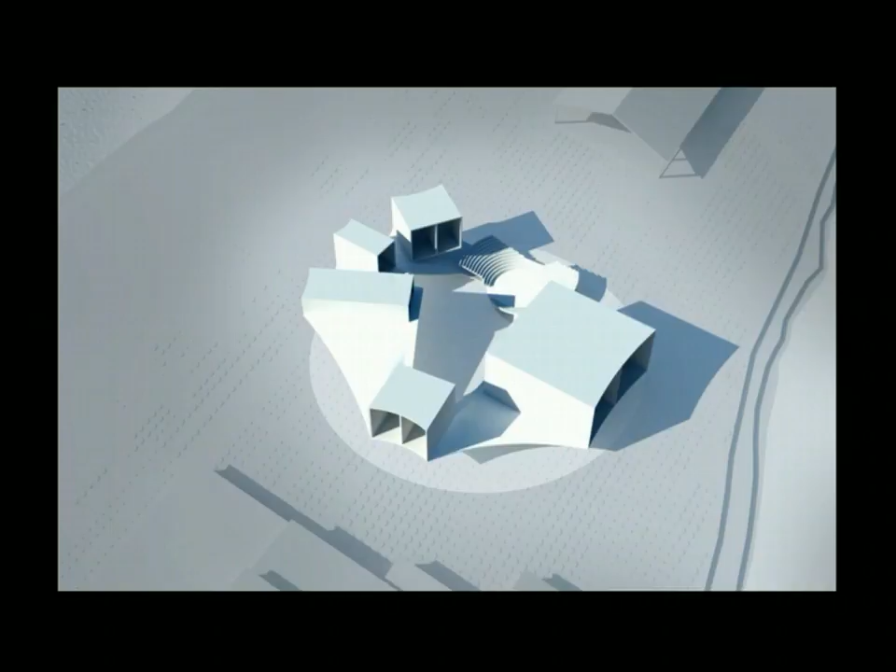So it has both an inward and outward focus, and then we stitch those training spaces together to create these in-between public spaces that weren't really for any prescriptive use, which we think is really important to generating grassroots publicness. And then by lifting the Circus Conservatory up, we allow for the public to actually move in and under the school for the performances.

And the last project I wanted to share is about public space and memory. This is a memorial to Sean Collier, who was an officer who was shot immediately following the Boston Marathon bombings on MIT's campus. And designing a memorial in present day, when we're saturated by digital media, was a challenge. And I remember seeing this sign as I went into the Boston Tunnel, and I thought it was really powerful and amazing, but it was fleeting. It was like a flicker, and it was gone.

After Sean died, there were many temporary memorials that popped up along the city, and then also on the site where he was shot and killed. And at the one-year anniversary, there was this incredible outpouring from the MIT community, and this notion of MIT Strong was very, very present, and also this term mens et manus, mind and hand, and strength.

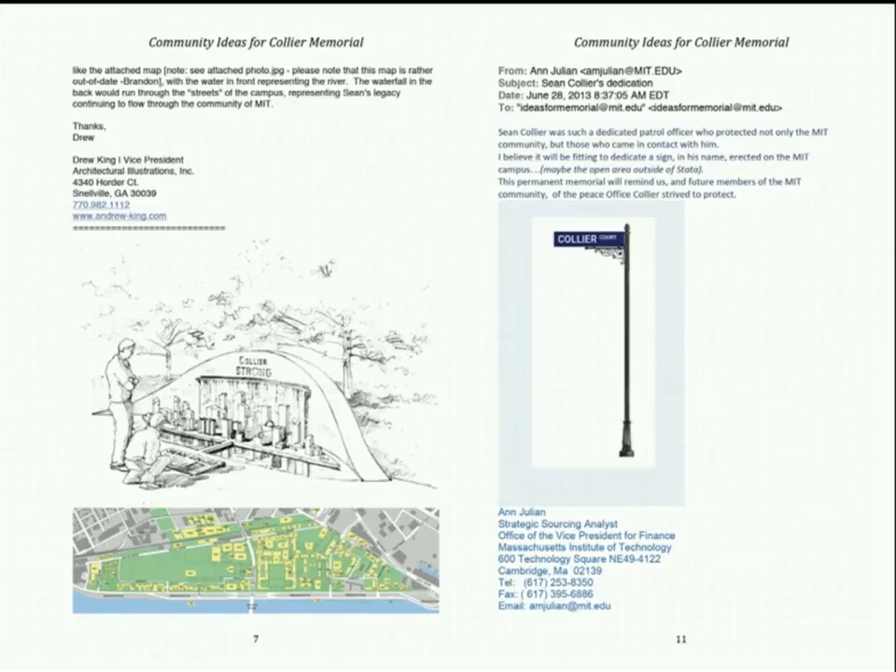But I said I would try. And so the first idea was simply to deal with this notion of hand and mind. The committee really wanted it to be very of MIT. So maybe you could take the open hand and turn it into a structure. They also did something very MIT in that they created an open call to the whole community. And everybody submitted different ideas of what the memorial could be. And my job essentially was to synthesize these different ideas.

One that kept reappearing was that of the cairn, the kind of stacking of boulders because of Sean's love of hiking and the outdoors, the notion of the forest. A lot of people wanted an American flag on the site. And the challenge was how to bring all of these together so it wasn't an aggregate of these different ideas, but try to find the essence of what people were really struggling with.

And I remember thinking about the simple star at the CIA for unnamed agents who are killed in the line of duty. And so a five-pointed figure was a way to address this issue of the American flag without a literal American flag there.

So this is where Sean was shot. It's between the Stata and the Koch building, two very massive, iconic, at least the Stata by Frank Gehry, iconic buildings. And so the committee really wanted the site to be very close to that location. So remember this X. So we took this planted area and turned that essentially into the site.

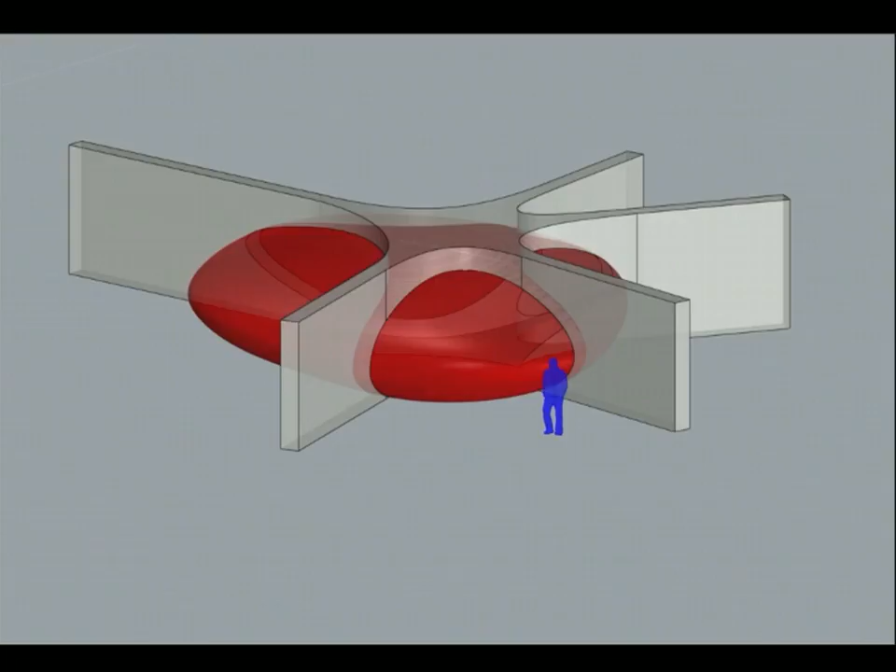I mentioned the five-pointed figure. The idea was to take a void out of that figure, and that Boolean or that absence would always be present as that kind of figure of the cairn or the figure that was missing, the loss of Sean Collier. The other thing about the five fingers is that it allows us to create multiple spaces and create a really porous memorial.

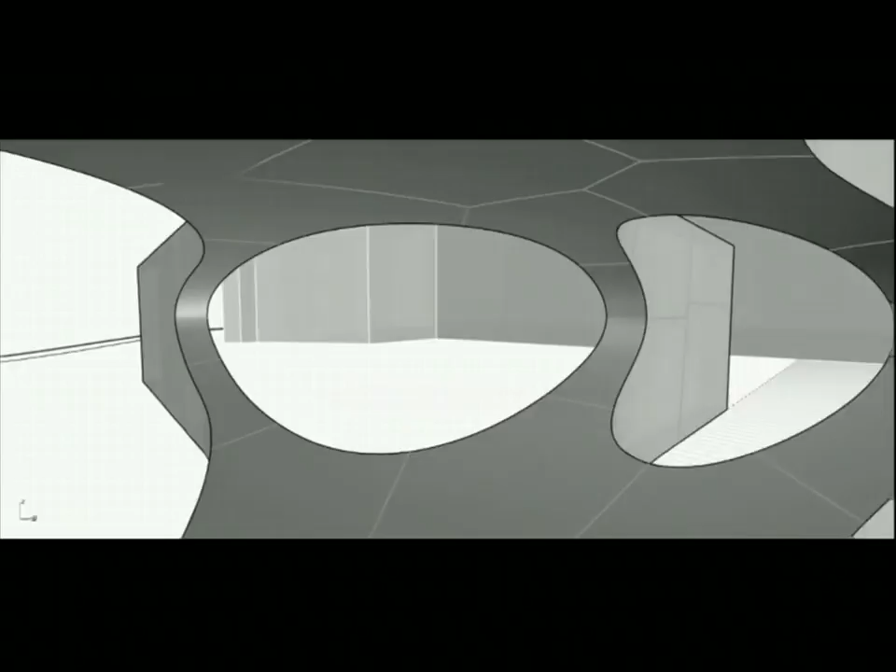So it's not purely a wall, but it's a threshold, it's a gateway, it's a space, and reminds people that MIT's campus is an open campus, and we're not going to close and make artificial gates, etc., but to celebrate that openness, but to create a kind of moment of pause within that gateway into campus.

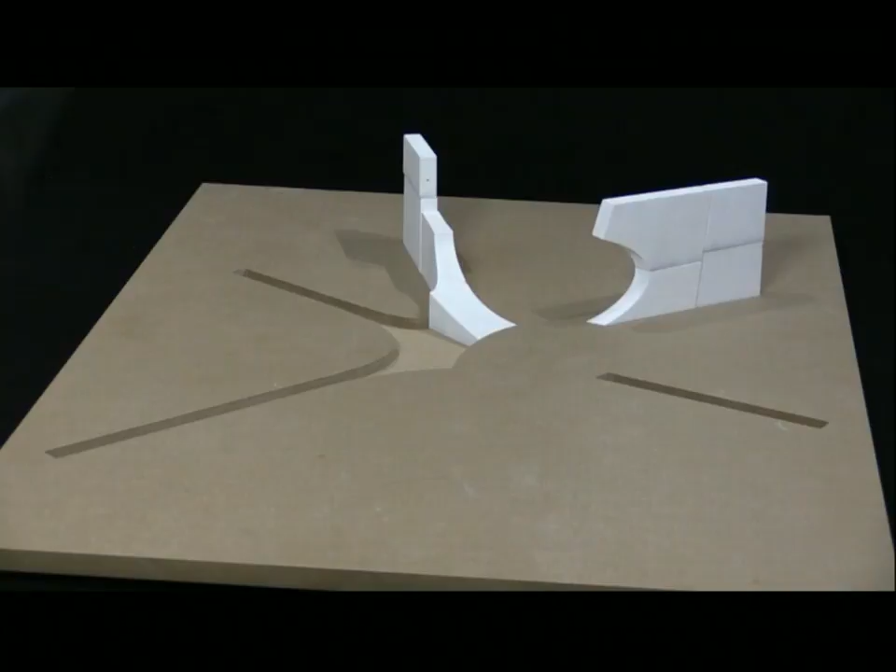Then the other thing that was constantly in my mind were these Inca walls that were made out of massive, massive blocks of stone, each completely unique and doing exactly what it needs to do structurally. So the idea for how to build the memorial came from thinking of every piece as coming together. There are 32 of these large blocks that essentially come together to create a vault, a five-walled vault, and that's the keystone in the middle.

So it uses pure physics and geometry. There's redundancy in it, so you can even remove a block and the loads span. And so it was important that we do this with that level of integrity and literalness. The first meeting, they said, oh, you can cast it out of concrete and clad it in stone. Actually, that's what the contractor said. The engineer wanted to post-tension it, to put a lot of steel in it. And we insisted that we wanted this absolutely flattest possible dome, but built using these ancient techniques of the Incas.

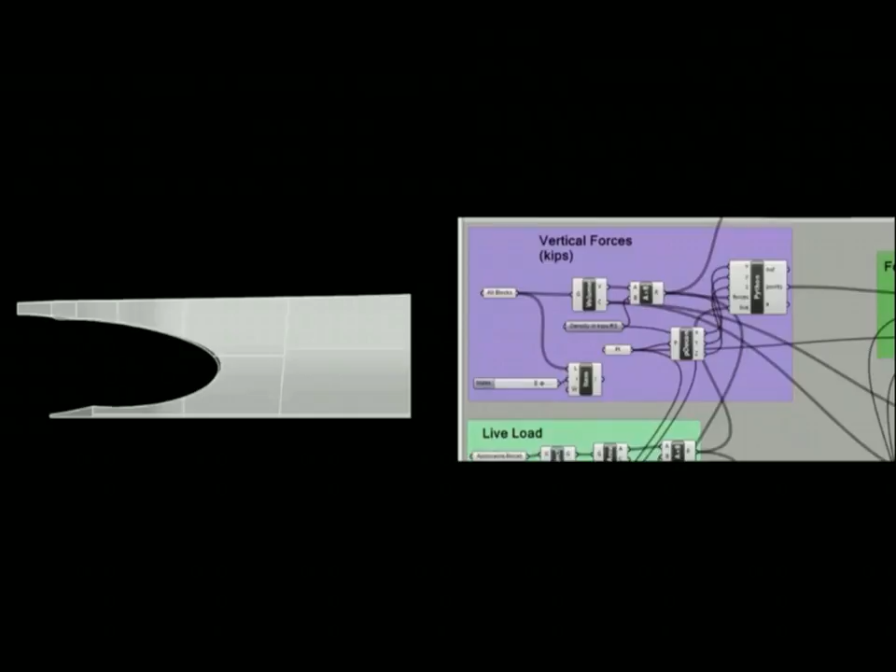In order to do that, we had to build in the ability to calculate the forces as we were designing the geometry. So our engineers helped us develop this design tool that enabled us to calculate the load every time we dealt with a wall. And so here you can see when the forces go outside that wall, basically it won't stand. So the thrust line has to resolve itself within the third point of the wall, otherwise it doesn't work. So that led to many iterations of different geometries that could work.

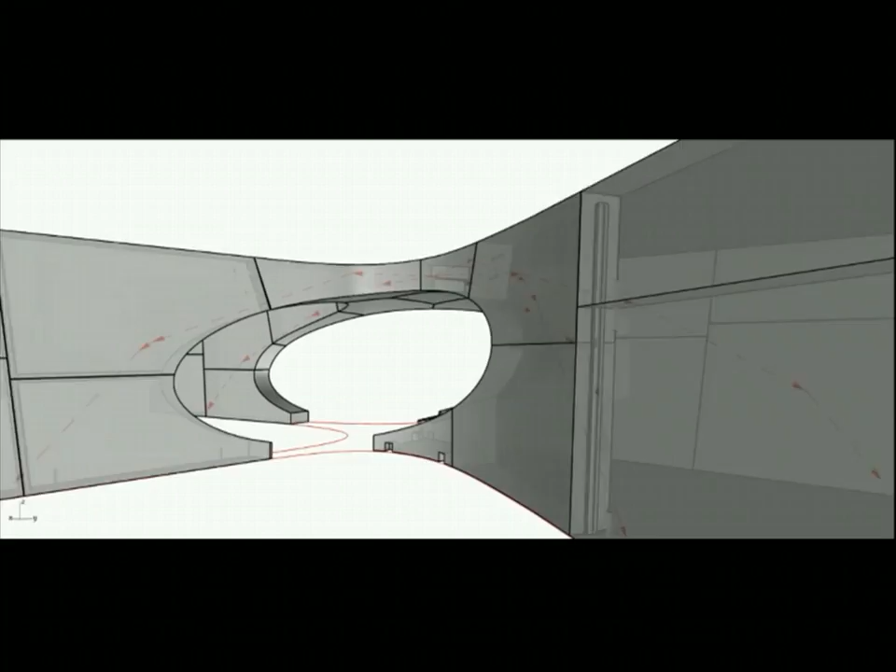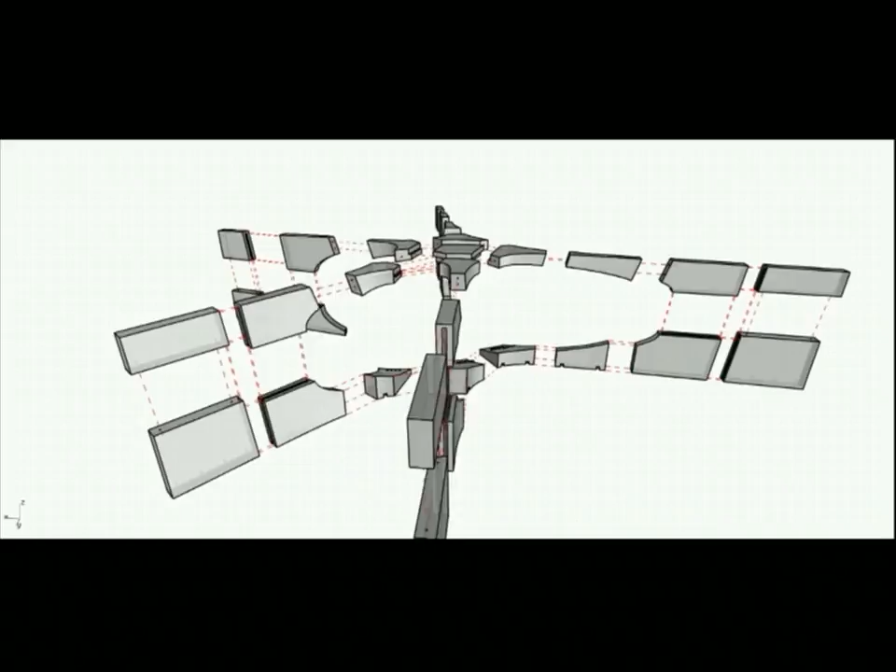And the final geometry was one that creates a window between two of the walls that are closest together to the actual spot where Sean was killed. Each of these pieces is unique and comes apart. There are small steel pins that help with the alignment and placing them together, and then do some structural work in lateral movement for an earthquake.

So each of those blocks came from a quarry in Virginia. This is the Jet Mist Quarry. And one of the things that I learned that was shocking was that these quarries have only a 15% recovery rate, right? So that means 85% is thrown away, which, just from a material point of view, was astonishing.

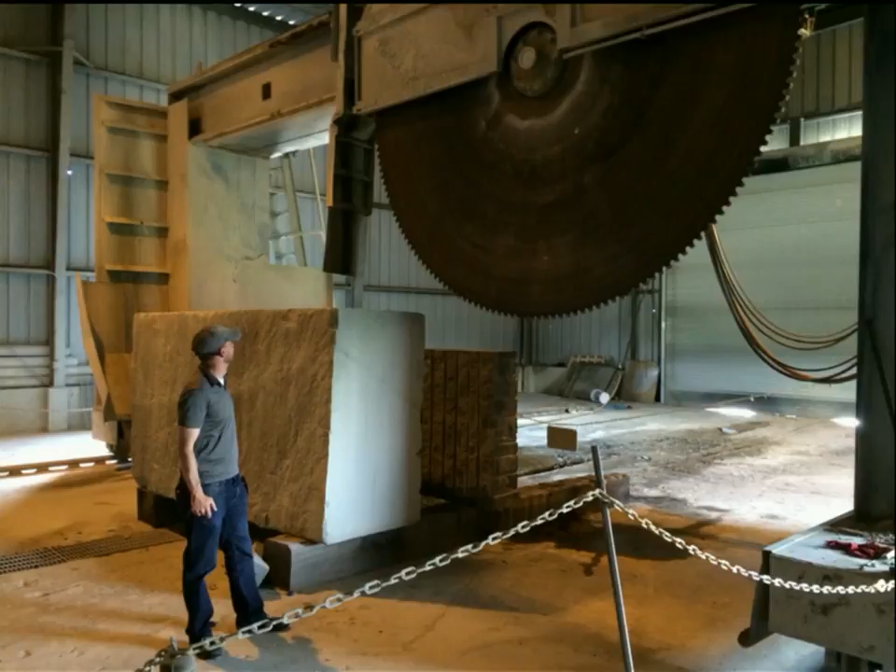So one of the things, and it's because there's tiny cracks and little green veins and these kinds of things that make them not perfect for kitchen counters, but for us, they were perfect. Every block could be used because we had such unique blocks. And so we would go hang out with giant rocks with our laptops and try to figure out how to three-dimensionally carve these pieces out of these blocks.

So there are some massive saws to do that. We used computer numerically controlled saws and robot arms, and the project was really one of subtraction. So from the first Boolean operation in the figured structure to the kind of removal of material and the carving of each of these individual blocks.

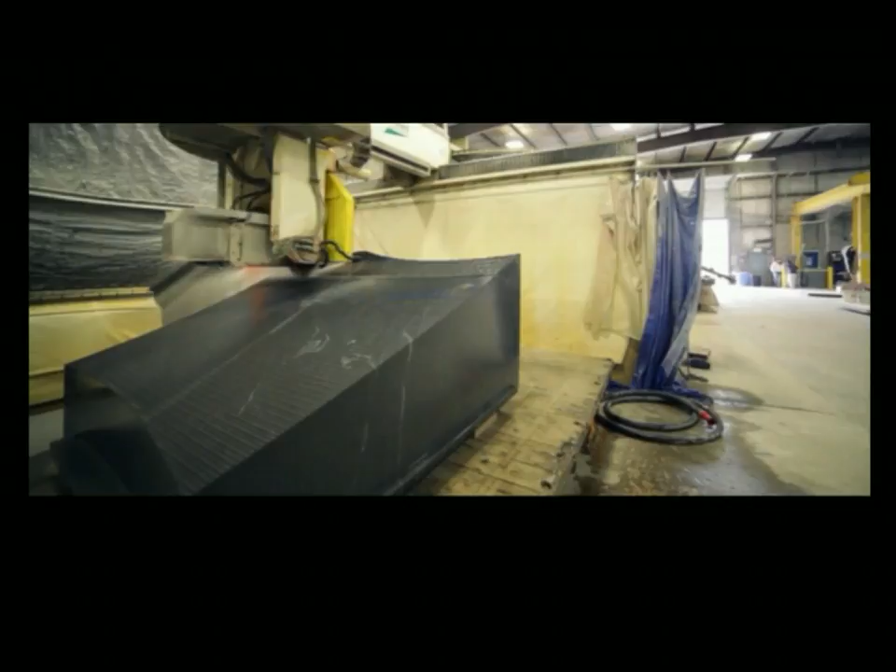The texture is kind of amazing, and you can see the blade sometimes is cutting and then sometimes going cross grain, and so it's essentially scraping material off the blocks as it gets finer and finer in terms of that surface.

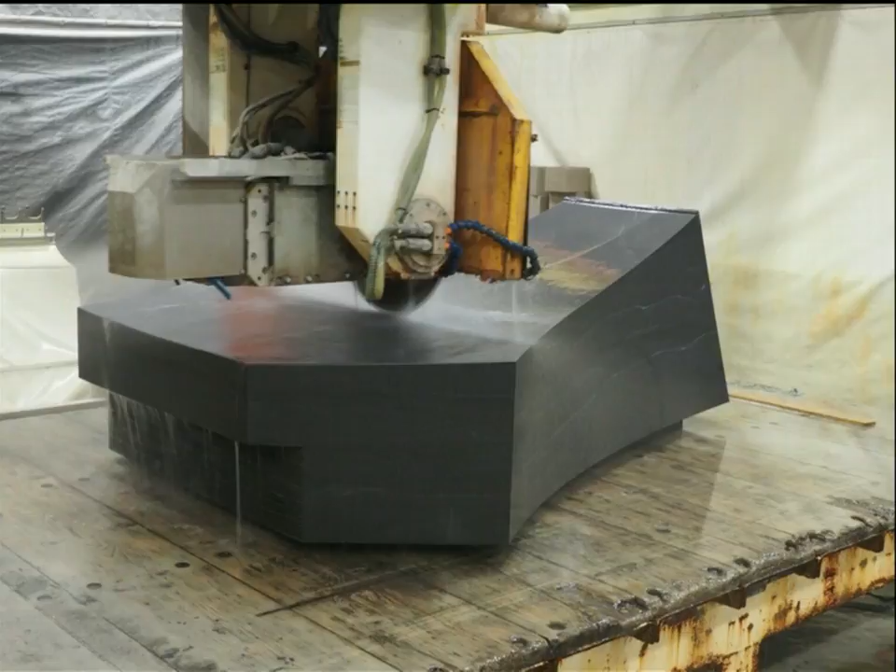So what was very important about the project was that, because we wanted it to work through geometry and physics and not through post-tensioning or steel, it meant that the tolerance issues were absolutely tight, that we could not be more than 2 millimeters off in any direction for the geometry to work. And we thought that was fine because we have computer numerically controlled saws and robot arms and computational tools, and it'll be fine. But the problem was you need material to remove material.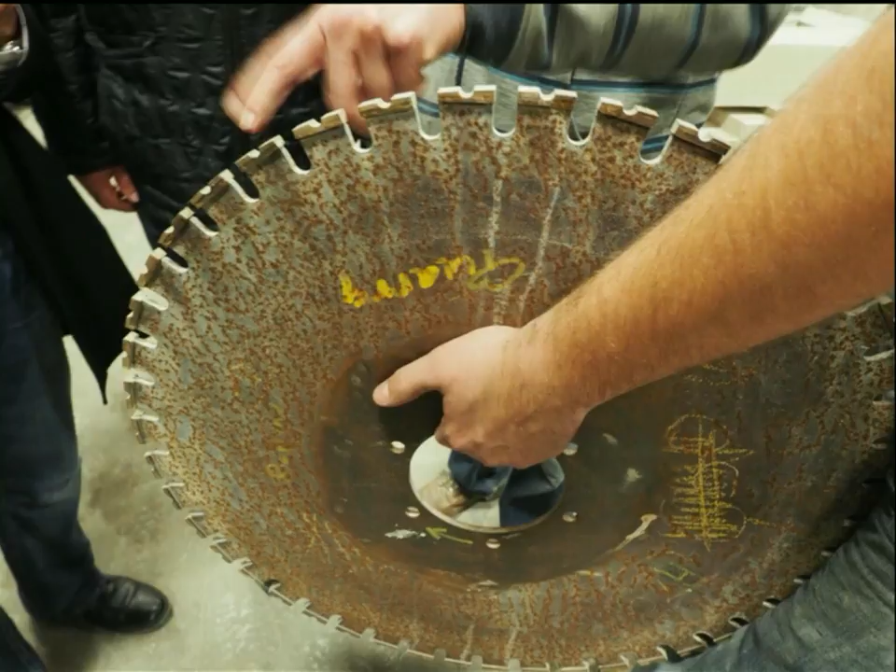And so the saw blades, as they were cutting, so some of these blocks took 24 hours a day over 7 days. So they were running 3 shifts just to carve sometimes one block. And so over that duration, the blade itself would wear. And there was no way to calculate how much the blade would wear over how much time. So we were getting blocks that did have millimeters of difference.

And so as each block was completed, they were measured. These were then registered with the exact dimensions, and then we would compare with our computer file and decide whether to make an adjustment in the next block or not.

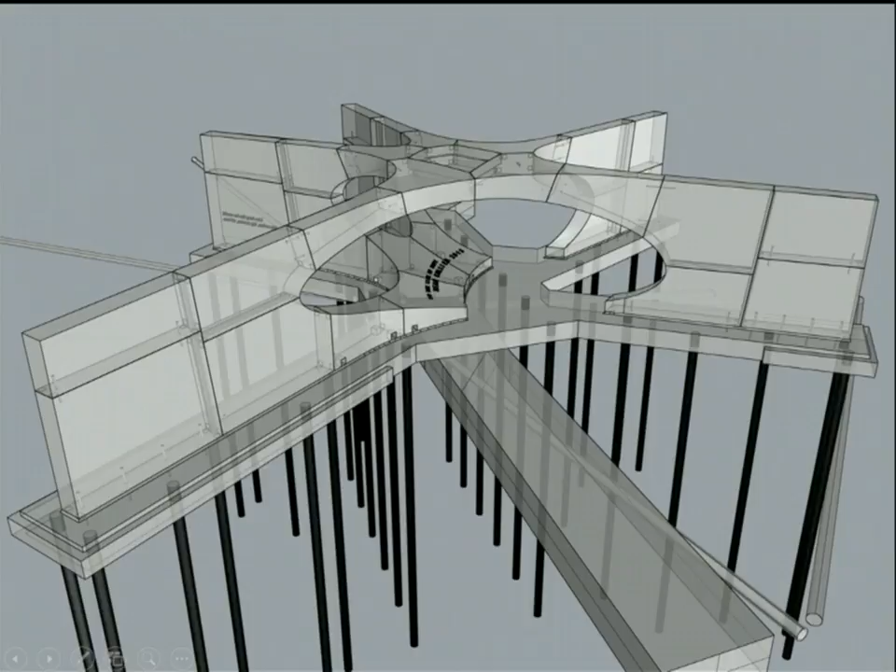In addition to that, the structure, because of its massive weight, it's 140 tons, sits on 33 mini piles that go between 30 and 45 feet below grade. And that site I showed you at the very beginning between the Stata and the Koch, apparently that's where all the power to MIT comes through. And it comes through this duct. So we had to be very careful to span and not have any of this massive load compress on the duct itself.

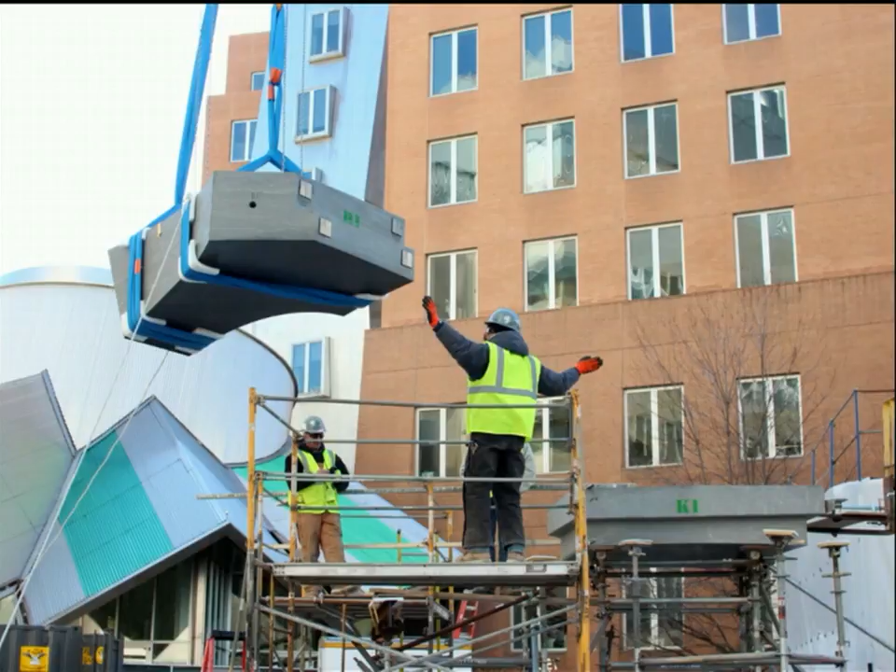There's the keystone. There's a shelf in the keystone. It doesn't have any pins, just pure geometry and gravity. They brought every block one by one as it was fabricated. It was then shipped to the site and puzzle pieced together. And it was built inside out. So we started with the keystone, which is kind of reverse of how you would think of doing it.

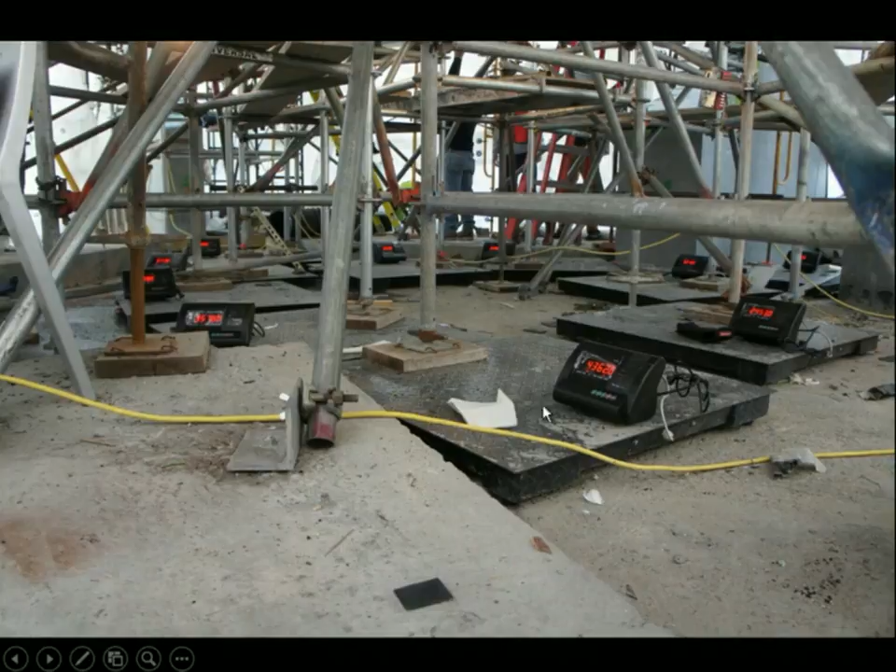And there was a temporary scaffold in place. That temporary scaffold was there so that when we lowered the scaffold, we would know how much the blocks moved and whether our calculations and our engineers' calculations were correct. So there were strain gauges put in every crack, and there were these massive scales put under the scaffold.

To make sure that as the scaffold was being lowered, so there was a little dial on each one where we could lower it micrometer by micrometer, essentially, and then just make sure that the loads and the thrust lines were behaving as we expected. And so these were being registered, and it worked. And the construction team felt comfortable standing under it, which they were very worried to do all along.

And the last element of the design piece has again to do with memory and time, and that was how to inscribe not permanence on the site of this public space, but this notion of a kind of single moment in time, the time he was shot. So what we did was we took the constellation of stars the night Sean was shot. So if he looked up, this is the constellation he would see, and we put those constellations in the ground plane.

He was 27, so there's 27 points of light, and this is the kind of first night that it opened. So it's become a public space at MIT, and as a memorial, of course, there is a sense of somberness and pause as you move through that arch or vault underneath. This is the portal that's the window to where he was shot.

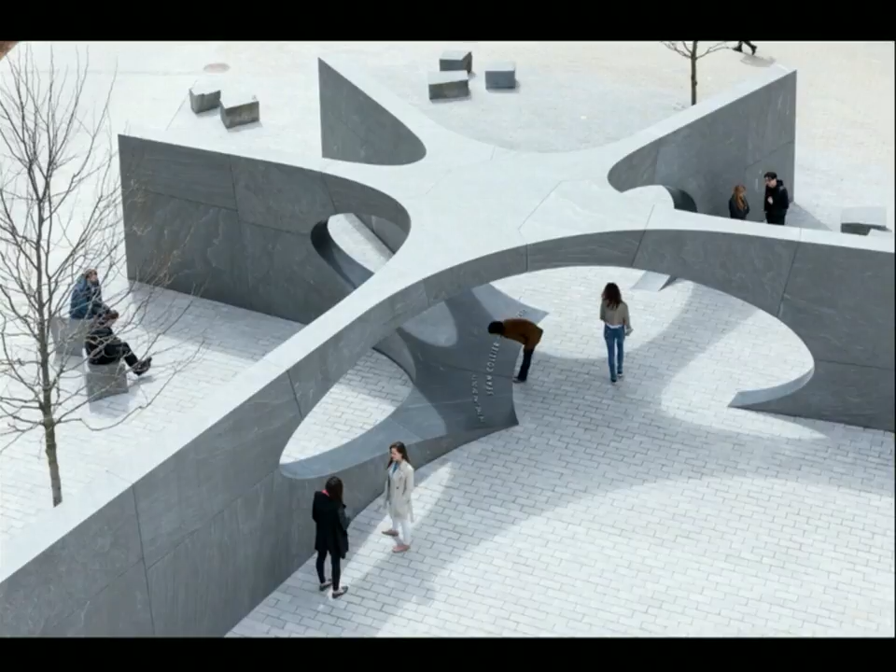And I think for me, it's been really interesting to see how loved this memorial has become within the public space of MIT. And you see crazy stuff. You see kids sliding down this, sliding down the curve. I'm waiting for the MIT hack where there'll probably be a football team standing on top of the memorial.

These adaptive and interactive installations, which she excels in, are really worth pursuing. They're on the border of architecture. There are few projects architectural. And as you've seen, the project of the Athens Olympics was really what made her into a household name. Her work is interesting because she not only conceives conceptually and enters this public realm, but also programs it and closely relates to the act of fabrication. So her designer role is redefined.

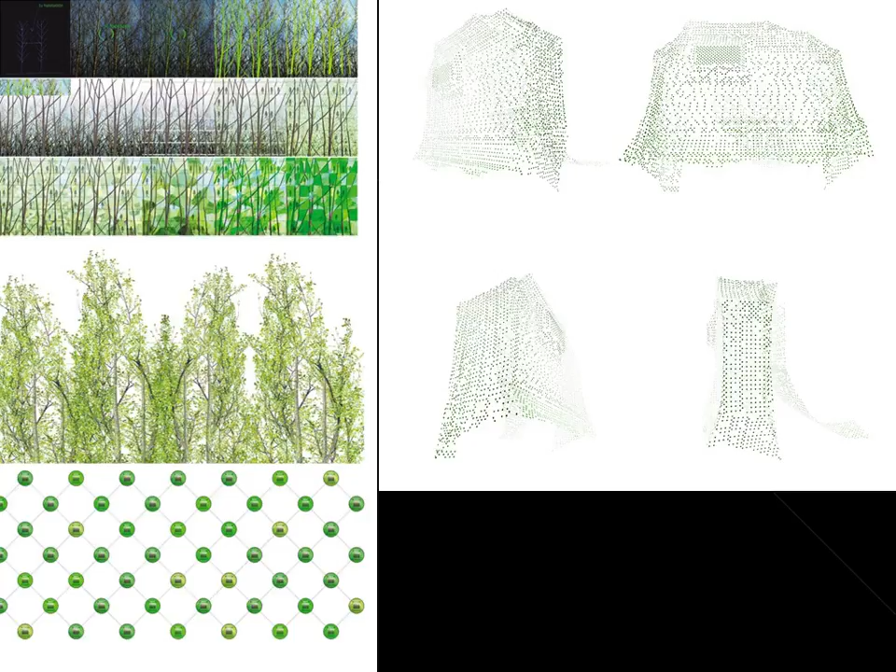Each leaf is independent, yet interacts similarly through a shared set of environmental circumstances. Electronics, therefore, are as simple as possible. Functioning as skin, the leaves offer a sizable reduction in air conditioning loads. So this direct analogy through a point cloud from nature to the man-made object is, I guess, what this building can be described as.

Here are a few images from this project. I think I have a clip from the designer's lecture, which I want to leave some time for. So, okay, well, this is the project. Or maybe he has.

His clip is later. Okay, yeah. Then this is urban forest, and a second project of his, which has been built 2 years ago. You probably have seen it as well.

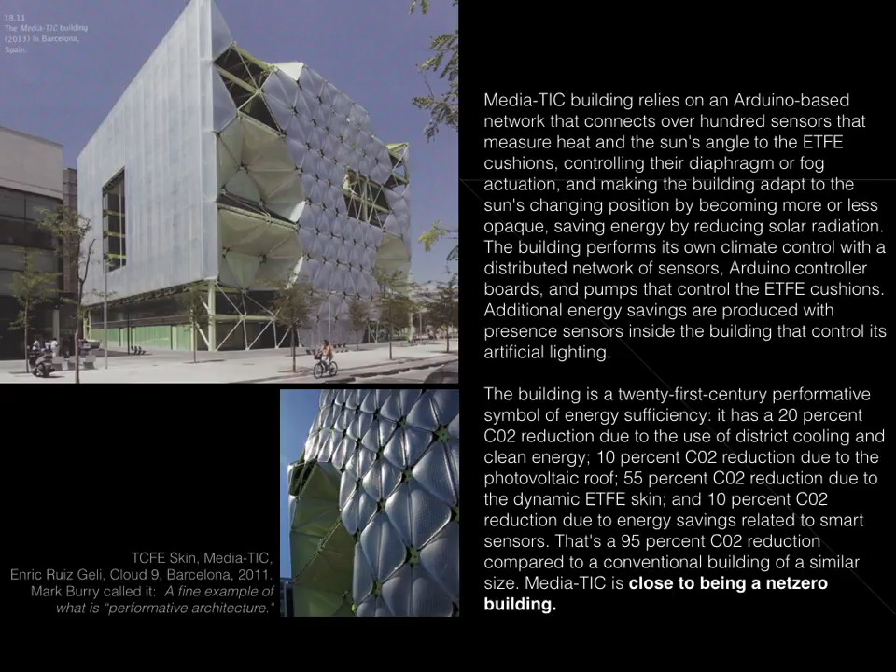It's called not Mediatek but Media-TIC, and the project relies on an Arduino-based network that connects hundreds of sensors that measure sun and heat angle and modify characteristics of ETFE cushions. So the nature of the envelope is changing, responding to sun conditions, becomes more opaque, and the building is kind of a symbol of energy sufficiency. They claim very big reduction and energy savings and being close to a net zero footprint.

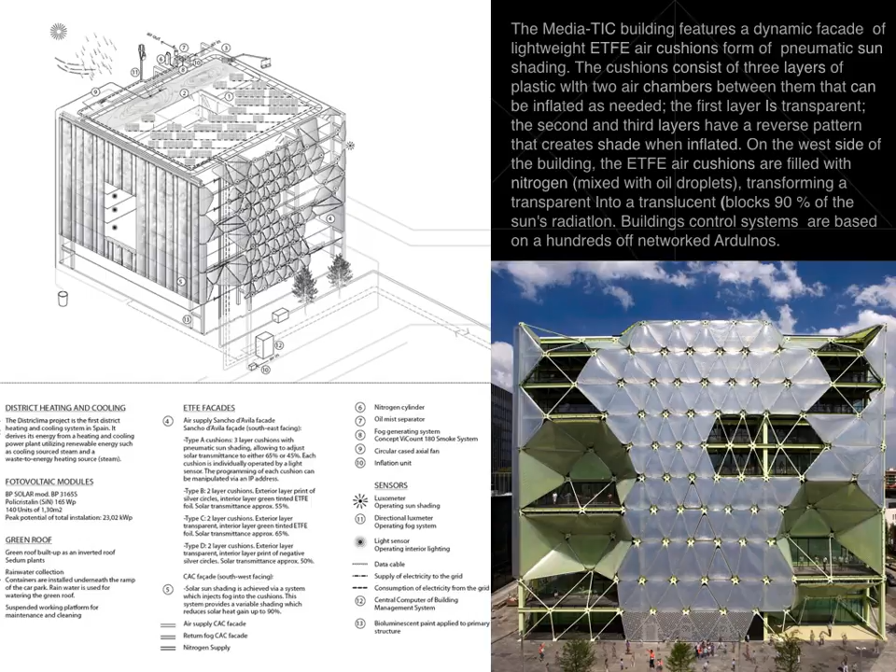The facade is dynamic, and air cushions form pneumatic shading. There are 3 layers of those cushions of plastics, and when those cushions are inflated and deflated, the opacity of the envelope is modified. This concept of a networked series of Arduinos and modification of the environmental envelope is important.

And theoretically, he says that if we knew how nature performs, its formulas, inputs and outputs, we would have a parametric system, architecture from information, parametric architecture capable of dealing with its own complexity. But maybe it is dead, or programmed but not activated. We need, just as in nature, logic with blurred, vague boundaries that function as randomly and as chaotically as particles. We need creative rhythm to produce certain accidents.

He proposed the notion of particles architecture, which is very interesting and original, and this is characterized in his most recent work, which is not yet built. But I want to leave a little bit for his lecture. From IAC, it's probably 2 years old.

Going to Figueras, 4 trees, 4 structures, 4 skin, 4 energy, habitants, inside temperature, waterproof, shadow functions, energy flow. It's a building. These are 9,000 leaves working together. Area. It's architecture of indetermination. It's a forest.

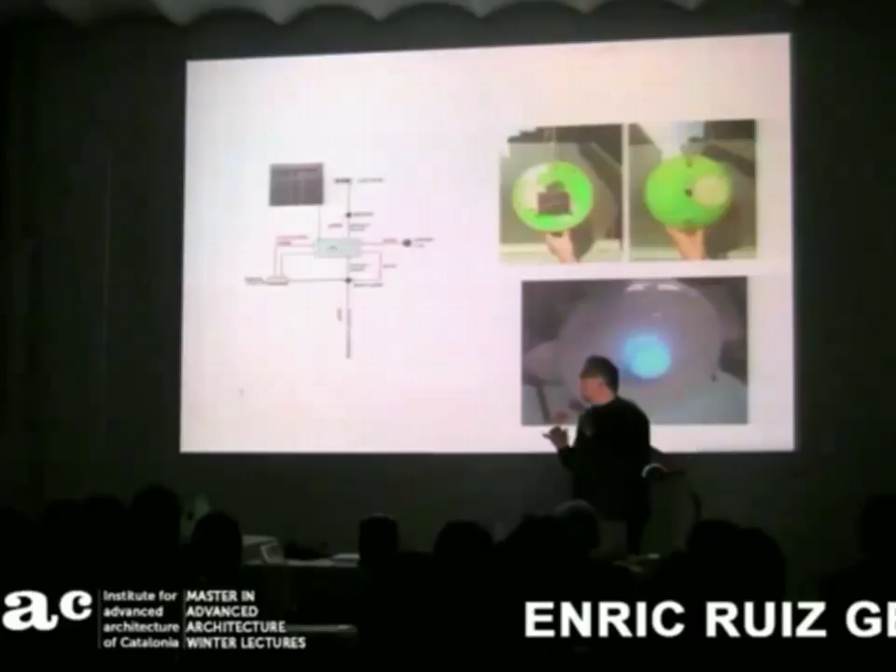But what is that particle? What is that leaf? We have a small computer, Arduino today, a PV cell that produces energy, that moves the energy to the battery, and a sensor that tells the computer it's the night. The computer asks the battery every night, how was the day? And the battery says, it's been shadow, 10%. And the computer asks the architect, what did you tell me to do? Well, just burn the energy using the red LED.

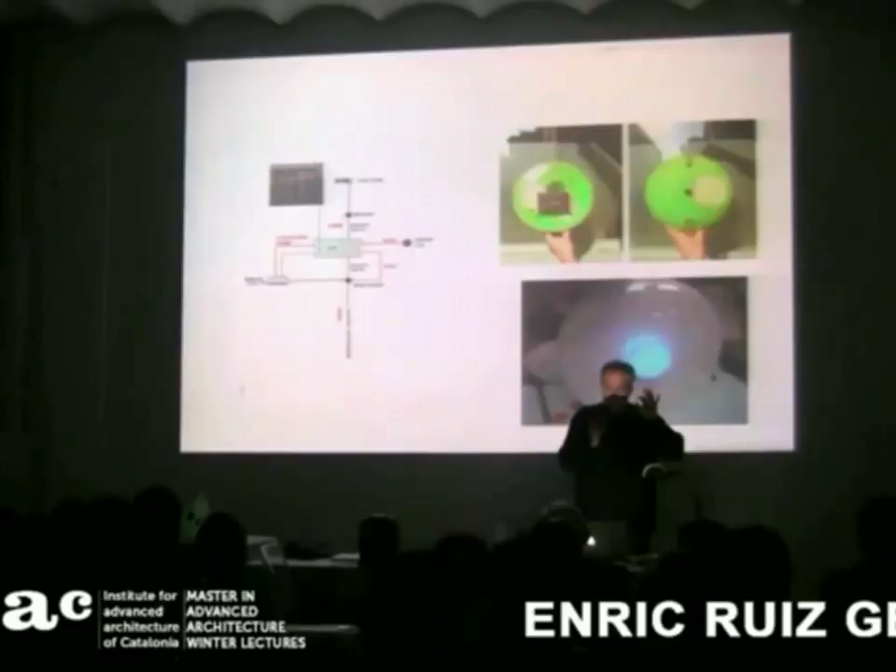And I did it. So every day and every night, the sensor tells it's the night. The computer charges and looks for the battery. What was the day? The day was sunny. The day was 100%, fully charged. Okay, what did the architect tell me to do? Burn that energy. 3 LEDs, white light. That's the prototype we have been working on with Igusini. It's self-sufficient, no cables, no data, no network, no hierarchy, no IP, no control over it.

This is the model we did. We spent about 4 months to do this model. My students, good luck with the model. Yeah, okay? So, what was about the liquid? Remember we were talking about that liquid? The fact is that I have to do something really good in Figueras. Maybe I get a chance to do something good in Girona. Maybe I have a chance to meet my people in Manresa, if that is good.

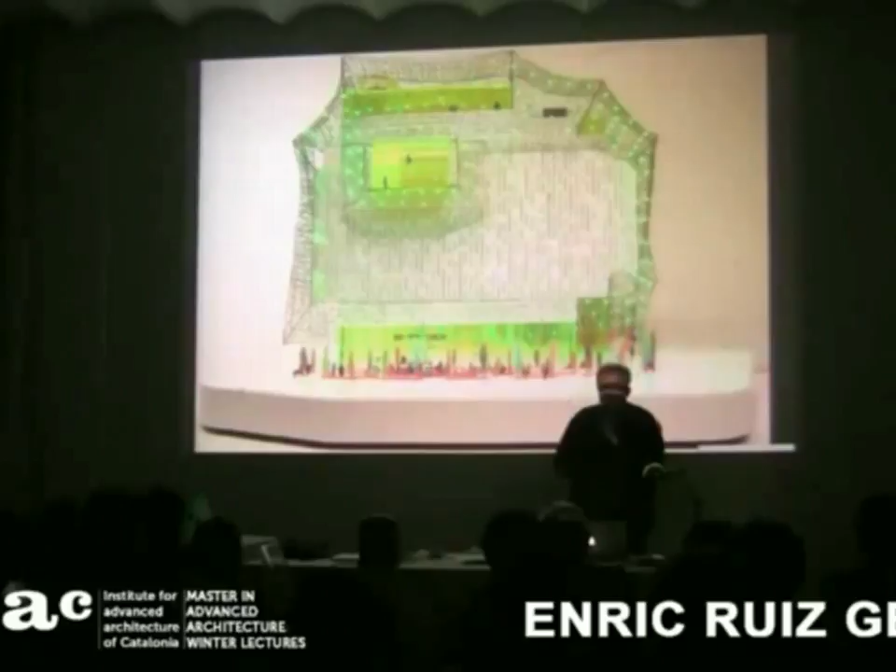And at the end of my life, of my career, I will be successful in Barcelona. But the dream was Paris. That was the vertical hierarchy that we are used to in other generations. Today, I do something really good in Figueras. This model belongs to MoMA, New York. Okay? It's flat. It's a liquid. We are together. No folders. Good news. So that's how it looks by night. That's the performance. So that's what the neighbors get.

Okay, so I guess the keywords which I use in this presentation are on the screen. I think that we are broadening or erasing the boundary between categories, and we see the importance of parametric design as a generative tool, but it is extended through the act of making and through the act of responsive or adaptive or dynamic or kinematic architecture assisted by robotics as a kind of area of concentration and future potential.

So even superficial engagement in a series of those domains, I think, will be of direct relevance to your future creative pursuits. Okay, thank you.